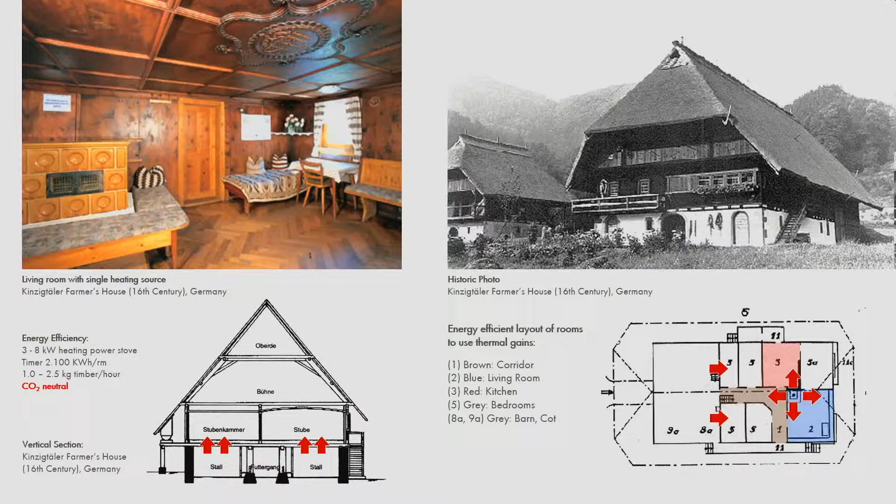So if you look over here, the barn was just over here. The warm air goes up, and I just had a kind of wooden floor, so the warm air was going from the barn into the living rooms. Then they had one central stove, one central fireplace over here, and they put all of the rooms around this one single place. So in the past, also the people have been smart. They've been working with whatever they had, both in the cold climates, but also in the hot climates.

Also look in the Middle East, this is like Dubai. People built wind towers. It was not about the cold, it was about the heat. How can we protect ourselves from the heat, or how can we create a more comfortable thermal environment? It's about human thermal comfort. So these people in the past, they didn't have air conditioning, so they built these wind towers. And later I'm going to show you one of our projects where we more or less copied or used a similar thing of collecting wind and bringing it down for higher thermal comfort of the people.

Now, also these were built hundreds and hundreds of years ago. Also, these kind of buildings were CO2 neutral. Of course, they didn't have AC and they didn't need a fireplace. They had so-called mashrabiyah windows in the hot climates. So they actually provided shading, they provided privacy, but they let the air passing through. And you know, I've been presenting this at a conference in Saudi Arabia, and people stood up, oh gentlemen, yeah, in the past everything was better, we were living without air conditioning, people were less sick, having no colds.

But actually, how does it work? I think we need to understand why we're doing these things. It's about our human being thermal comfort, how we feel comfortable. And the United States, or the Army of the United States, in 1943, did a kind of experiment, they put human beings in a climate chamber, in a climate box, and locked them in.

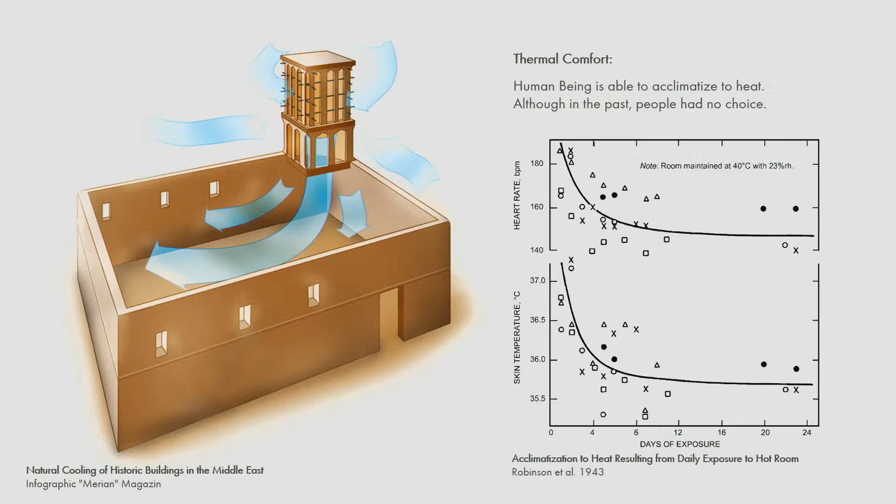And they started, you can see this is a kind of temperature over here, and the days of exposure. The top is the heart rate, the bottom is the skin temperature. And you know, when people are put into an unpleasant environment in terms of temperature or humidity or a combination of both, your heart rate goes up and your skin temperature goes up, so you're feeling uncomfortable. But this curve is going down, so after about 6 to 8 days of exposure, you start feeling comfortable.

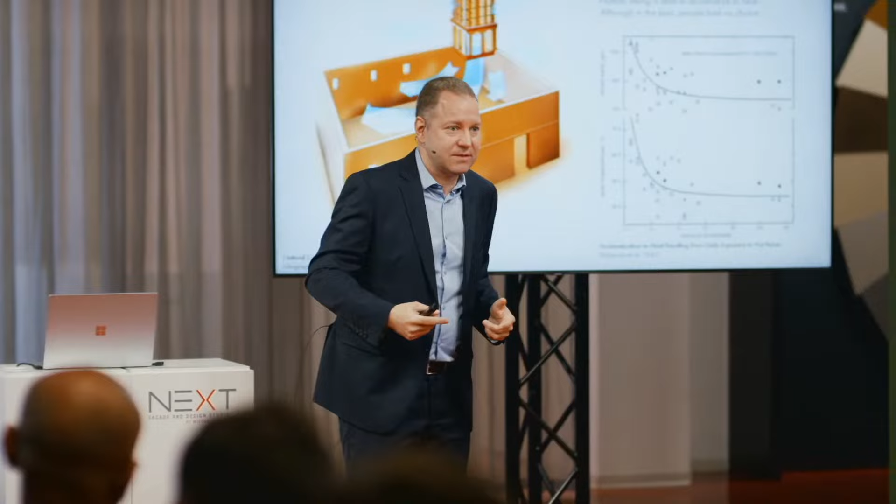It's the same when you fly to Spain for the holidays. At first, oh, it's so hot over here, and after a couple of days, you acclimatize. So we as a human being, we can acclimatize to different climates. But nowadays, we're no longer willing to do it. We want to put the AC up and down in our car and so on. So sustainability starts with the understanding of us as a human being, because in the end, we're building buildings for human beings.

And this is what the past is. So this is a kind of mashrabiyah to get some airflow getting in through there. So it's about the past, what people did in the past. Now, we're transforming some things from the past into the present, and maybe also into the future.

This is one of our current projects in KSA. Now, currently, Saudi Arabia is booming. There are a lot of developments over there, and we're getting questions, how can we create a more comfortable outdoor environment so that people can walk along and feel like in Italy, have a coffee, have a bit of gelato or ice cream, whatever. So it's about two things, about shading and also providing higher thermal comfort in terms of airflow. You know, when people stand, airflow is bringing your thermal comfort up in a hot climate.

So the whole idea, for example, with this project was to link the buildings. It's a kind of big development, and we're building a big central spine, we call it, and along this central spine, people can then walk along and get shading. And we also put in these so-called wind towers. You can see these kind of things that actually stick out.

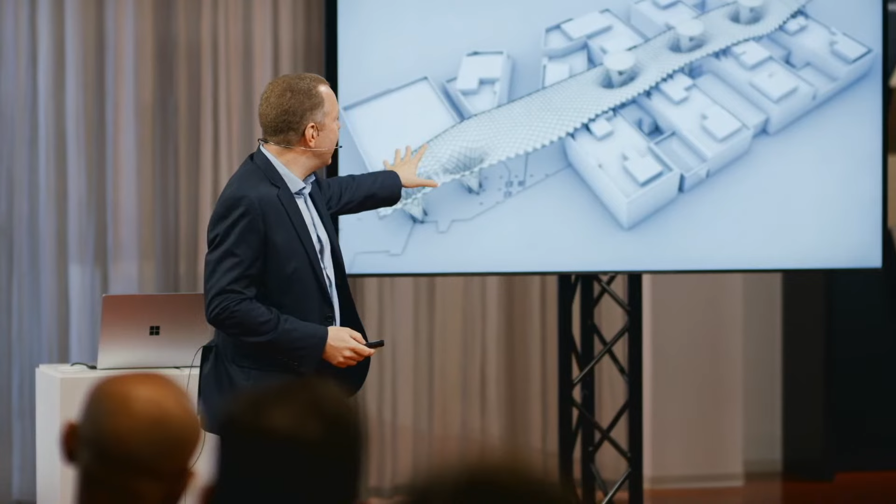Nowadays we know the main wind direction, so we know where the wind is coming from. We start collecting this wind and driving it down through the wind towers to street level, trying to achieve high thermal comfort for the people around there. This canopy has up to a 60-meter clear structural span, a kind of grid shell structure.

We put the wind towers in place. The wind towers have certain flaps inside - I'll show you later how the design works. But it's about thinking how can we get this designed, doing CFD analysis and all these studies, and then getting it built, meaning doing structural calculations and optimizing the geometry.

This is also something I try to explain to young structural engineers: the starting point is our brain. All these tools we have in terms of structural engineering or parametric modeling, Rhino, Grasshopper, and so on - it starts with the question, what do you want to achieve? The software only gives you an answer, but you need to know the question. Don't expect the software to give you both the question and the answer. It doesn't work. So we start with relatively simple geometry optimization.

In the end, structural efficiency is about arches. We're building arches like the Romans did, like the Pantheon in Rome, built 2,000 years ago - a big arch, the ideal shape. We do similar things nowadays, and this is not what the software will tell you. The software can optimize things later on.

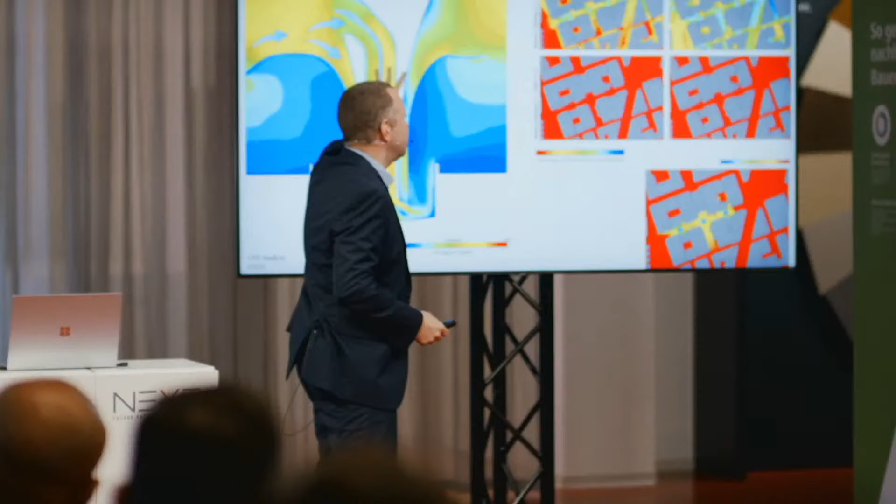This shows a couple of slides on the geometry optimization, getting the grid shell. There was another consultancy called RWDI doing CFD analysis, and this shows how we pick up the wind at the top. Our wind tower at the top has a rotating drum, so based on the two main wind directions, we can rotate the drum and collect more wind.

You can see here how the airflow goes at the bottom and then into the central spine. The blue areas here show zones where the thermal comfort of people walking along is significantly increased, without any mechanical means of cooling down the air.

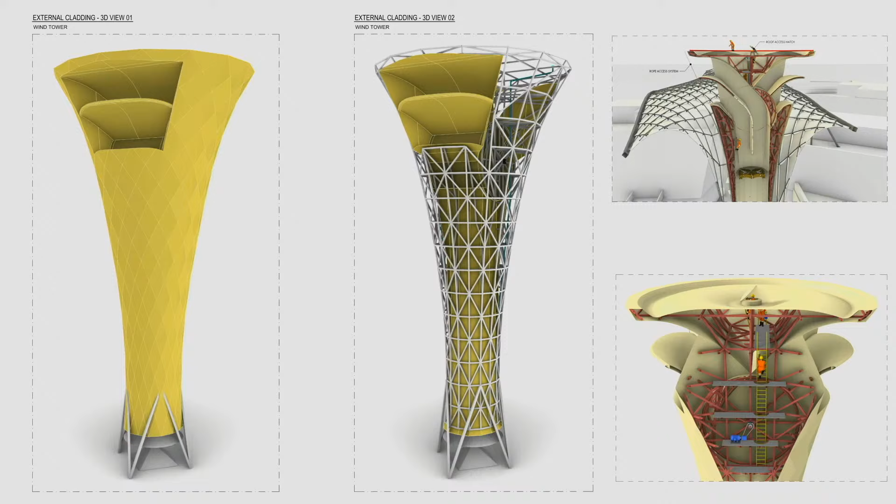So quite nice things, but the complexity starts with how can we realize it. You see here it's a complex steel structure, complex cladding, and the maintenance need to get in there - there are mechanical parts, a lot of components. We're building mega scale elements to improve the microclimate in the city.

With these things, people did ask, what about times when there's no wind? And totally agree, there are times with no wind. So we integrated a fan system, having mechanically driven air with silencers to blow the air artificially down by mechanical means. Of course this takes energy, I totally agree, but this is how we actually did it.

We then have a so-called misting system. It sprays a kind of water dust into the air to cool it down - evaporative cooling - and this runs almost 24/7. It shows the kind of complexity of things.

All of the shading is realized by kind of sails, fabric sails at a larger scale, pre-stressed, with a couple of nodal points. It's a relatively traditional steel grid shell with box sections and CNC machined nodal points - relatively standard, but at a big scale, let's put it this way.

Some more images showing the kind of system, and you see the complexity. This is a kind of custom design, this is what nobody did before. We take the requirements from the client - okay, this is the thermal comfort we want to achieve - and then we provide the technical solution for this. It's similar for outdoor thermal climate and outdoor thermal comfort.

This is one of our built projects, the Expo 2020 in Dubai. Werner Sobek was the lead consultant, the architect, the structural engineer, the facade engineer, and also the site engineer for all of these shades and sunshades.

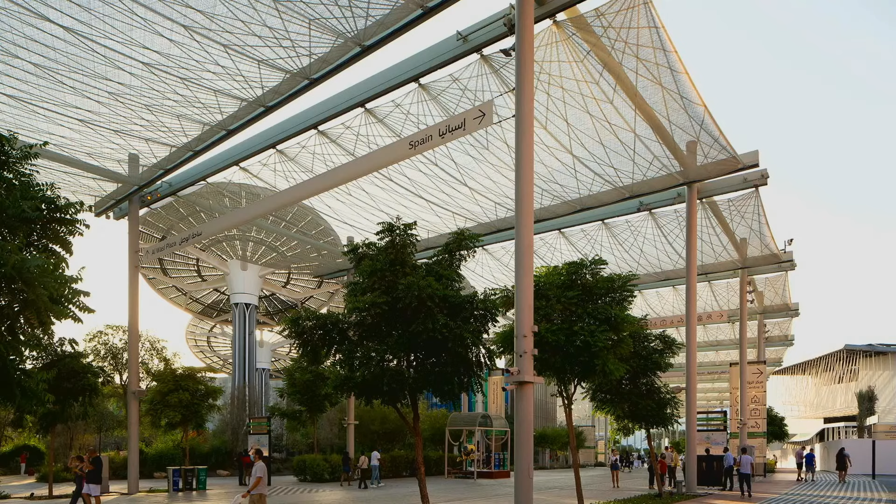This is a so-called active system, so it can be open and closed, this kind of operable shading system. This system itself, you can see here in a couple of nice photos, realized with an Italian fabric product.

There are three different types of shades, and there's going to be a video a bit later explaining what the background was. And I hope that this is going to work now.

We have to reduce dramatically the emissions. The announcement is to reduce CO2, greenhouse gas emissions, within 10 years by 55%, which is something different than saving 55% of energy consumption. This is even more difficult to achieve.

Everyone underwrites that, but nobody really makes clear to himself what that means, because if we are not capable of changing the technologies we use to produce the materials, to build the buildings, to run the buildings and to demolish them, then in 10 years we are allowed to build only 45% of the amount we are actually building now. That means half of us becoming unemployed.

Standing in front of a problem which says either you change everything or you cannot build in the way you build nowadays will urge this interdisciplinary process, that people start talking to each other and say either we invent something or we are lost.

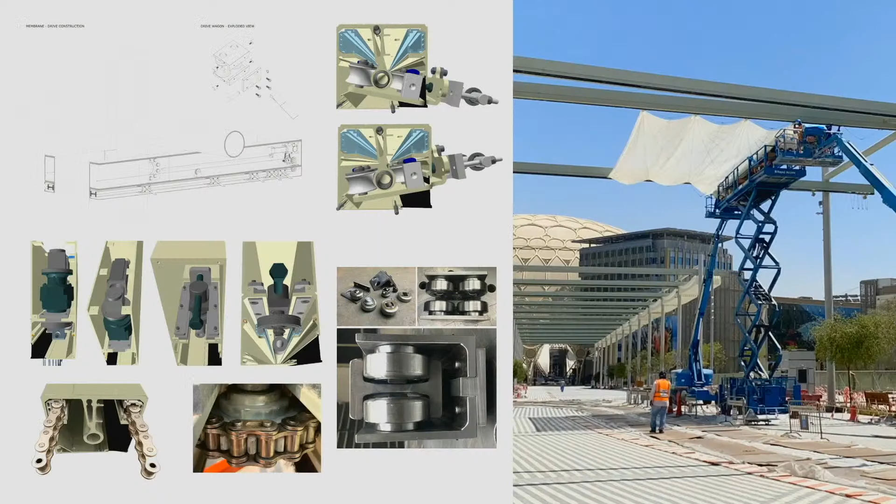There's a lot of mechanical parts also. This is what we take on as a consultant, as a complete challenge. We say we do the design for the membranes, but also for all of these mechanical parts, which need to be tested and proven, with the chain-driven motors and so on. This is the final system, how it opens and closes.

Now this project itself got a lot of awards for improving the exterior thermal comfort of the people there. It's really a nice example.

But moving on, using membranes, I mentioned before that we want to use membranes, and this is the kind of thing, you know, we have either opaque, transparent, or translucent materials. Now our facades always have to have a certain light transmittance, because the people in the building want to have light. This can be achieved either by glass, by transparent elements, or by translucent elements.

So this is the ThyssenKrupp Test Tower in Rottweil, one of the biggest membrane projects done in a vertical orientation so far. It's a kind of cladding of an elevated test tower. There are no human beings really inside, but it shows a kind of large-scale application. And you know, this is a kind of thing, so we started thinking about mono cladding, providing a rain shelter as a secondary skin.

So the outer skin of the facade doesn't have to be a piece of glass. It could be something more lightweight, translucent, letting air through, letting light through. There's currently a research project at the ILEK, at the University of Stuttgart that we collaborate with, using a kind of fabric, a fiber facade, using fibers to collect rainwater and also to get evaporative cooling.

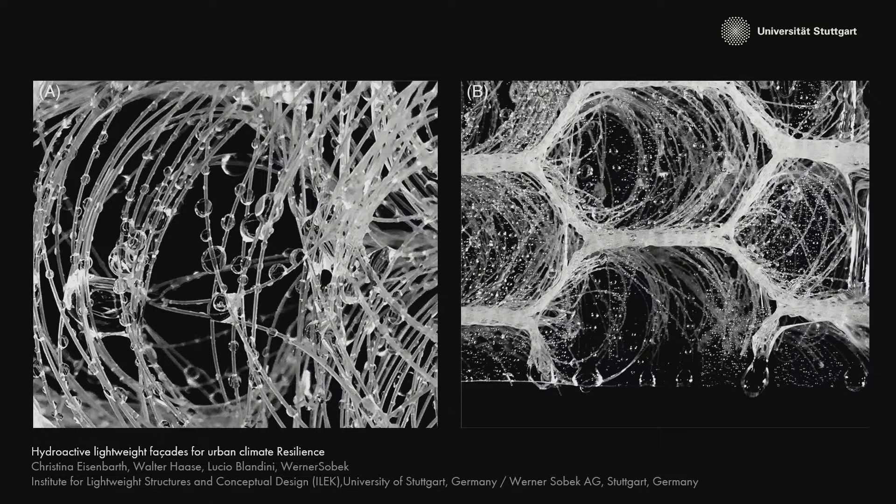Now these kind of things give the idea. We're using a micro mesh, very small fibers. These very small fibers are either able to collect rainwater, which we collect in certain drain channels, but at the same time we're trying to enhance the microclimate in cities.

Due to global warming, our cities are getting warmer and warmer. How can we cool our cities down? One thing is, of course, to plant trees, greenery, but often we don't have the space. I'll show you some project later on where we do this.

But the idea is that we collect the rainwater during the cold, rainy times. And then during the hot days of summer, we spray this rainwater on top of these microfiber meshes, and it evaporates with the natural airflow through this mesh to the interior.

This is a test tower by the ILEK in Stuttgart. You can see this is the kind of setup over here. It's called a hydroactive lightweight facade system for urban climate. The idea is that we are cooling a microclimate down in the city. So this is currently getting tested, and here are some results.

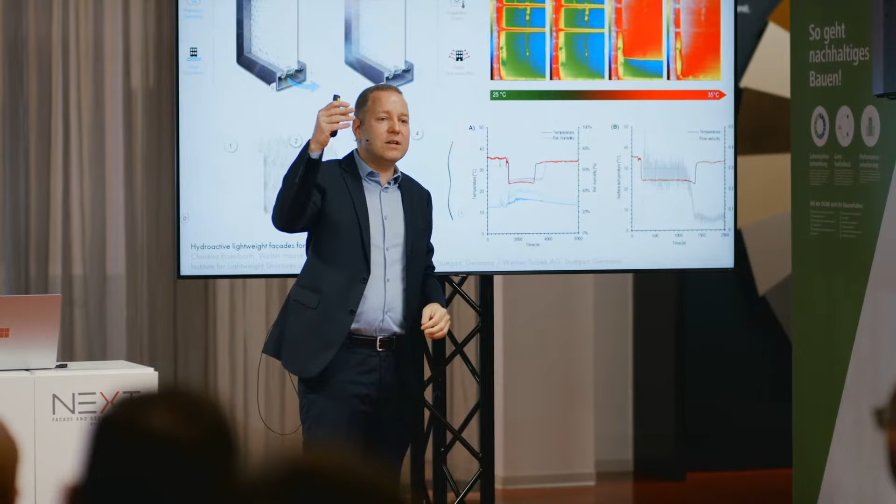You can see here, this is a kind of elevation of the wet state and the dry state. The wet state means we're spraying water into this microfiber mesh from the top, then we have natural airflow through this mesh. You can see here by the colors, we get a temperature drop of 10 degrees Celsius. The air is getting cooled down by 10 degrees just by means of water and natural airflow. No air conditioning, no compressor, nothing at all.

You can see here, this is a kind of temperature reading. This is the system being switched off. Then we spray water, and it drops about 10 degrees Celsius down. Of course, the humidity level is slightly increased, but we see this as a big future.

Maybe in the future, we're not going to have such a strict separation between glass and aluminum panel. We do something more lightweight, translucent, open kind of meshes. It also comes to the understanding of the human being, and this is the thing I'm very keen that we look into.

I'm currently working together with one glass supplier on the transmittance through glass. Every piece of glass that we're using nowadays has a certain coating on it, so-called low-E coating. So the transmitted spectrum through the glass that comes from the sun is a certain filtered spectrum. And this is the kind of thing about human beings and light.

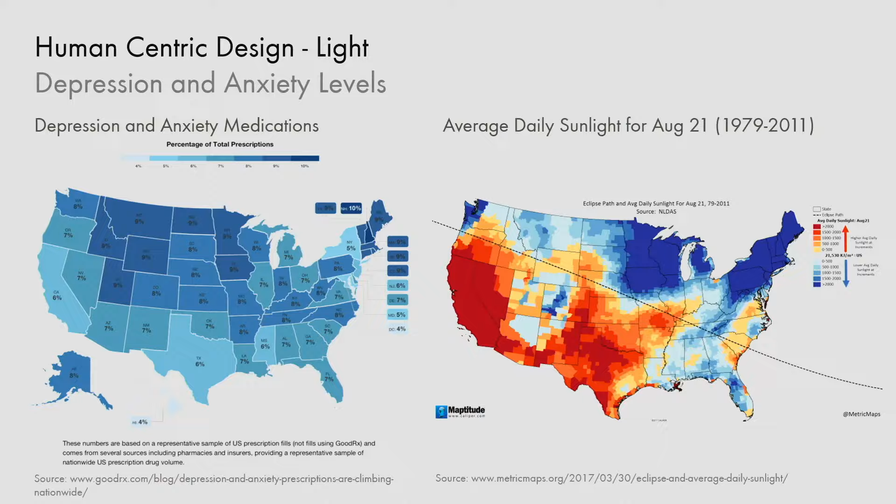At the same time, they have the highest amount of natural sunlight, so there's a clear correlation between sunlight and human well-being in terms of mental health. What does it bring us to? We as human beings became an indoor species. We spend most of our time indoors. This American study found about 87% of our time was spent indoors, inside rooms. We get our light from light bulbs and through glass. So we spend only 6% in vehicles and about 7% outdoor.

These are a couple of new things we're currently researching into: how the human being behaves under certain light conditions, and what kind of glazing we need for the future. What kind of glass selection, what kind of coating on the glass do we need as a balance between sustainable building design and human-centric design?

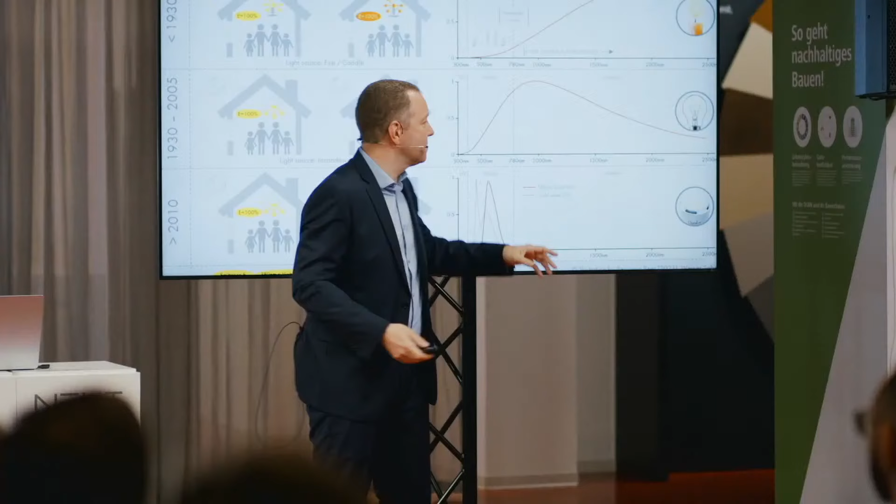For example, this is a traditional candle. This is the emittance, the spectrum a candle emits, and it's a lot of long-wave radiant heat, the long-wave red spectrum. Then we have the normal light bulb, which gives us a peak at about 1,000 nanometer wavelength.

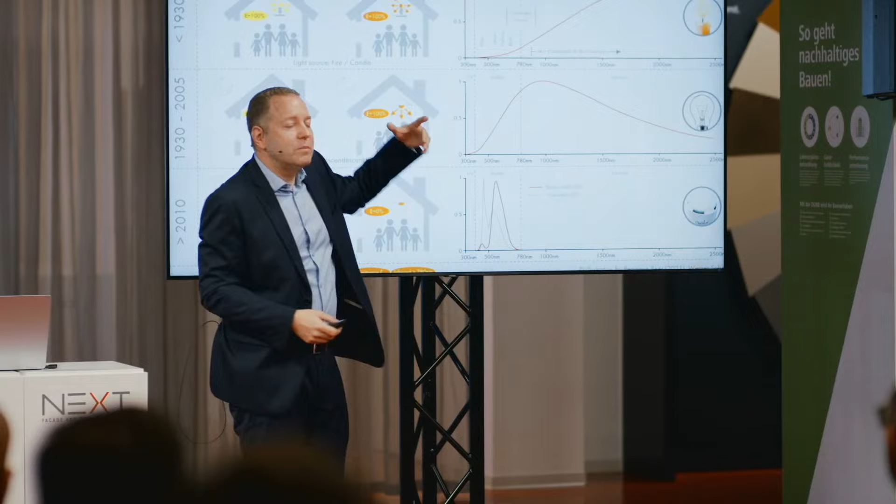What's important to know is that we as human beings can see the solar spectrum between 380 nanometer wavelength and about 780 nanometer. That's what we call the visible spectrum of light. Nowadays, for example, the LED light bulbs we have do not emit anything above 780 nanometer wavelength, and this is where the energy efficiency comes from. But this also means that in the past we as human beings were exposed to all of the spectrum, all of the wavelengths, whereas nowadays that's gone with LED lights.

If you now look into light and the human being - I'll go to the glass later - this is the penetration depth, how deep certain solar radiation, certain spectrum, goes into the human skin. You can see the penetration depth starts at about 800 nanometer wavelength. That's exactly the wavelength that LED lights no longer emit, and that most of our glass coatings no longer transmit.

Going through this to the glazing, to our glass, what we install: in the past we just had single glazing, or people were just outdoors. For outdoor people, you're exposed to the full spectrum of sunlight, the complete wavelength range, starting from the ultraviolet and blue to the visible spectrum and the infrared.

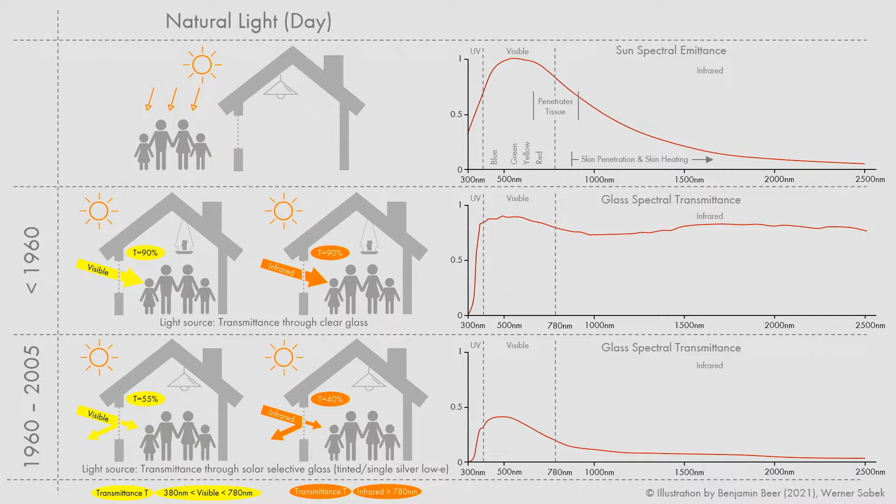Then came the so-called single silver and double silver solar control coatings, which went further, becoming more solar selective. What we have nowadays - this is the latest state of our low-E solar control coatings - they no longer transmit any spectrum above 780 nanometer wavelength. So the whole infrared spectrum is gone.

So we're doing certain things to ourselves as human beings. We humans have been on this planet for millions of years, and now, just over the last 10, 20, 30 years, we're starting to experiment with ourselves in terms of exposure to certain wavelengths which are no longer present because of energy saving. I'm not against energy saving, but...

I just want to show you, for example, all of your mobile phones - iPhones, Android, whatever you have, Samsung - they have this night mode. Your night mode takes away certain blue spectrum of the light, and this is important for the so-called circadian rhythm.

Talking about wavelength, this is a new medical approach against Parkinson's disease. This is the red light spectrum that our LED lights no longer emit, and our glass is no longer transmitting. I'll go through infrared relatively quickly - I'd like to focus on the blue spectrum. It looks a bit medical, what I'm talking about, but in the end it's all about our facade systems. We need to take the long way and close the circle, coming back to us as human beings and what we need to design.

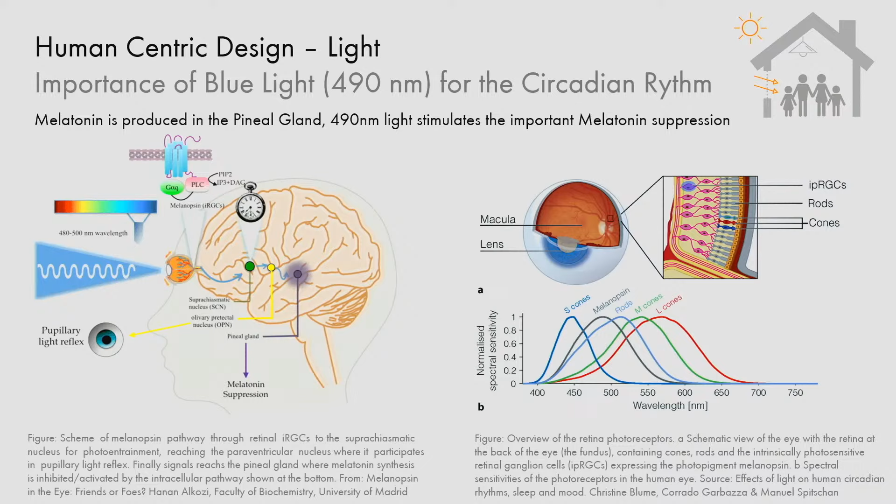Now, talking about your mobile phones and the night mode or comfort light you switch on - it usually takes out the blue light, typically in the afternoon when we're going to sleep. There's been medical research, even a Nobel Prize awarded for this - the circadian rhythm, which dictates your day and night rhythm. In the morning and at lunchtime you need blue light, but after lunchtime you should get less blue light exposure, otherwise you won't fall asleep. This is why mobile phones have this night mode - it filters out the blue light, making it more yellowish.

Why is this important? When we select glass, we have the so-called visible light transmittance of glass, which shows how much natural daylight in the visual spectrum the glass is transmitting. Now we have the so-called melanopic transmittance of glass - so we look at glass not only for visible light transmittance but also for melanopic transmittance in the blue light spectrum, which is important for us as human beings. We have to be smart and understand what the human being needs - it's not only about shading or G-value, it's about refocusing on us as human beings.

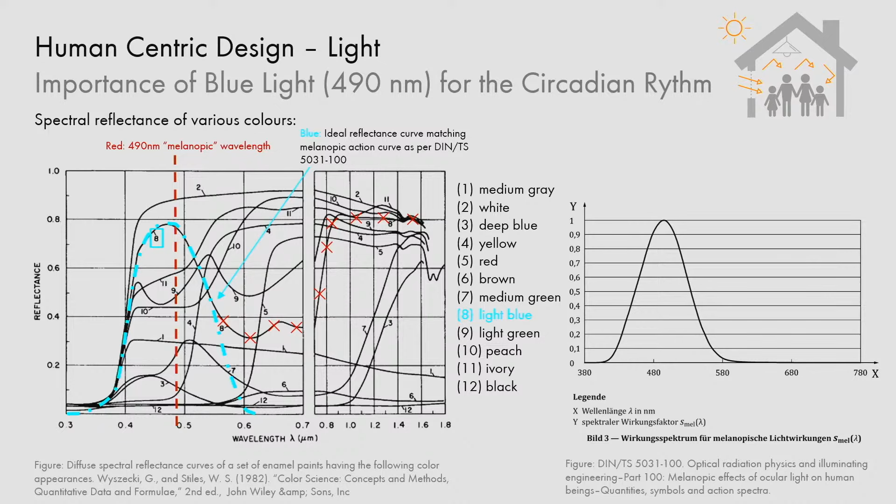Quite often it's not this complicated - let's put it this way. This comes into other things too, like what colors we use in our rooms. I think a lot of architects here know it's the so-called spectral reflectance of certain colors - is the blue light spectrum reflected by these interior colors? There's a lot of interesting research that, in the long run, will change how we design buildings and do interior design. It's all about refocusing on human beings.

Talking about 490 nanometer wavelength - what color is it? It's blue, roughly this bright blue, then going into dark blue and to green. This is the color we prefer as human beings, and it's exactly the colors we want when looking out windows - a bright blue sky, and some fresh green, not dark green.

Looking at the property market, how does this translate into real life? All the apartments around Central Park command a premium - park view is like double the price. So people want to see green, and people also want to see blue. This comes back to understanding what we need as human beings.

So what can we do? Talking about parks, for example, this is like Central Park - this is one of our recent projects, I think one of the largest true green, living green buildings. It's Kö-Bogen II here in Germany, Düsseldorf. In the end, the building became a park - we built a facade system that's completely green.

It's not only one thing - people ask why we do it. For example, adjacent buildings - people on the other side are no longer looking at the gray facade of a neighbor, they're looking into greenery. So the surrounding buildings' value goes up because people get a park view. So what's the future? Are all our buildings going to look like this? I don't think so, but we have certain issues we have to tackle.

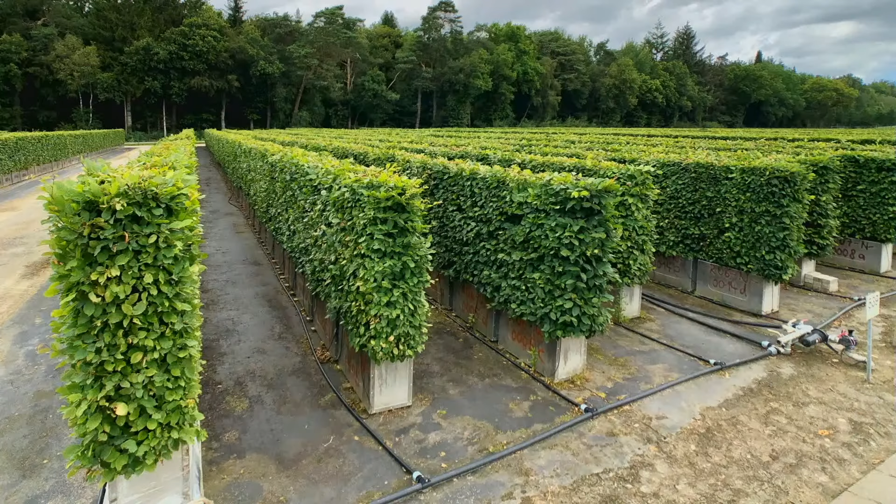We're talking about the living facade. It's a lot of collaboration between the designers, facade engineers, and also botanical people. So what kind of plants do you choose? You need to plant these plants, you need to do test mock-ups. And you can see on the left, the mock-up.

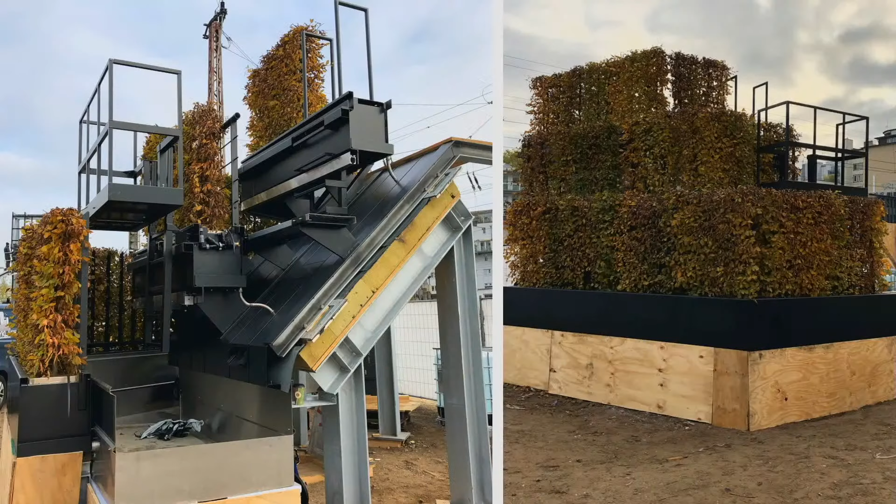You start designing certain planting pots. They need to be drained. If there's strong rain, there's too much water; there might be too little water. So you need to have a kind of system to get water over there. You need to ensure maintenance, so the gardeners need to walk along these kind of things. So it's a lot of things you have to consider.

It's in the end a completely different facade system compared to what we traditionally do. But if we say that we want to get our cities in a better environment, we want to do something about the micro-scale environments of the city.

This is a couple of photos from the construction. It's all prefabricated, the plants in the boxes. Now you can choose which kind of plants you're going to take.

These plants follow the rhythm of nature, so you have winter, you have autumn. There are some other plants that are always green, but in this case, the client wants to have something that shows also the winter. Of course, this is not the bright green that we want to see, it's more brownish. But this is what the client wanted.

Actually, the installation, a couple of slides. And this is how it is built. It's a really nice example. But I would say, can we also build such a thing in Dubai?

Put a question mark behind it. I mean, green is not always green. In the Middle East we have no natural water, so all of the water comes from desalination plants with a lot of CO2 carbon emission to get the water. So such a thing in Dubai, I would say, it's not really green. It looks green, but in reality it's not green. In a moderate climate like Germany or Europe, this makes sense because we have enough water.

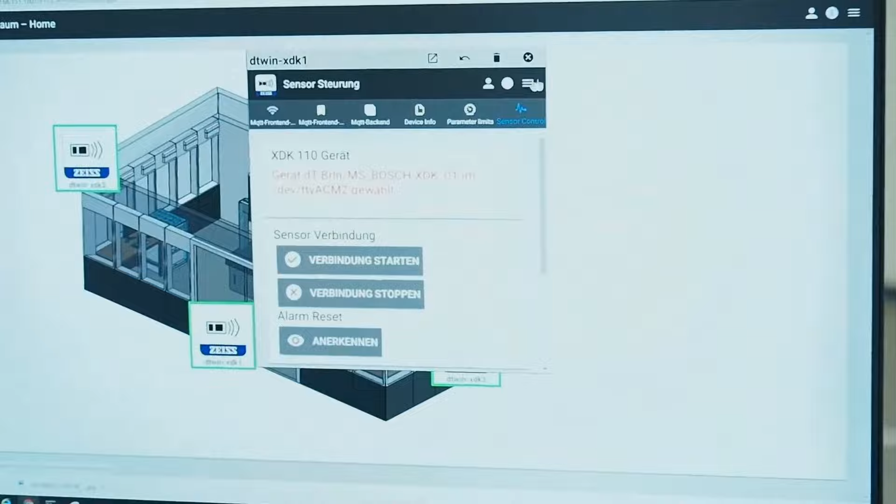Then when you start looking at your unitized facade system, there's a sensor at the top, and the system starts communicating with your VR glasses. Within the virtual environment, you look at the unitized panel and can see certain parameters, what this facade panel currently has in terms of wind speed, humidity level, and so on. So you walk along and grab certain conditions on the unitized facade panel, see all of the data, and then you can see if the facade has a malfunction, something isn't working, something's broken down.

You can log in as a certain service personnel, as the building owner, and put the shades up or down with just fingertips.

We see that previously some of these facade systems, these active facade systems, had the issue that the building owner has one computer and it's far away. So you walk through your buildings and every unit you can just touch it and see what's the current condition, how does it work, if there are some issues we need to fix, and so on.

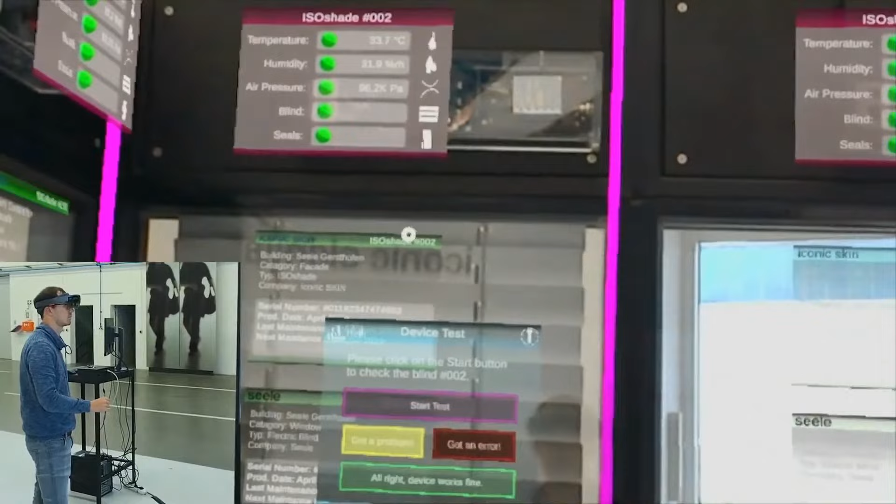Is it the future? Potentially. Is it kind of a technical gimmick? Maybe something in between, but we think it's a useful approach of doing new things, doing things a bit different, and being smarter, just using the technology that we currently have.

Just going to go to the next slide. Now these are the last couple of slides. I think the half an hour is almost gone, so I'm going to be quick now. So what's the future? At our office, at Sobek, we always want to think ahead.

What's the future? I'm a guy working a lot in glass, I'm a speaker at glass conferences. So we've got to think about this, because in the end, people like glass. And if you look at certain properties, people still like floor-to-ceiling glass, full-height glazing, compared to a punched window with small windows. People want to see, people want to have the light, people want to have the vision to the outside.

So why don't we build a kind of monospace? Just build a kind of glass box. Of course, people say it's completely crazy because glass is very weak in terms of solar shading, in terms of U value, and we all know glass is brittle, it's going to break structurally, it's weak, and so on. But why don't we give it a try? We need to see where we want to go.

Of course, a lot of technical challenges. So this is the kind of idea: to have a switchable glazing monospace, just completely glass, so you're almost like outside. This glass controls the transmittance, the solar radiation. We're also able to actively control which spectrum we're going to transmit from the light.

It's going to be without any aluminum. Sorry, Arvind, but it's currently designed as a kind of glass shell. Of course, currently we cannot do it, but we want to see where we want to be in like 20, 30, 40, 50 years. What's the goal? We need to see where we want to be.

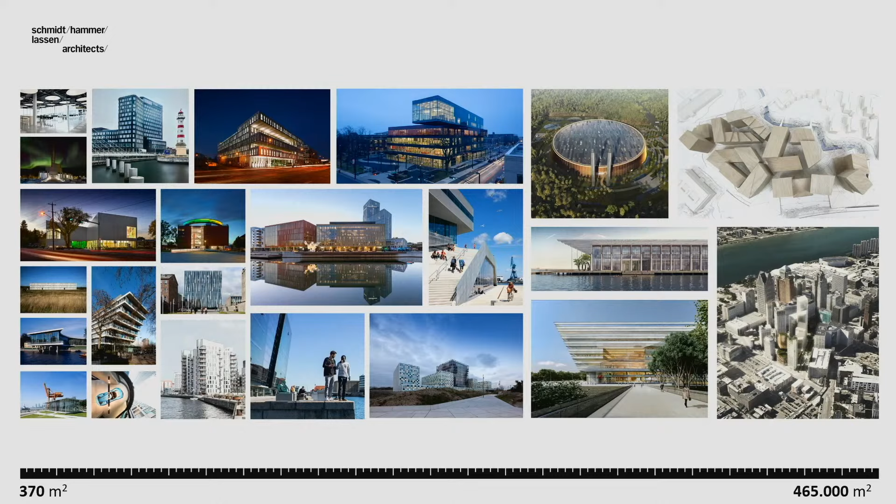I'm going to try to share a little bit about what we're doing in our design office and about a few of our projects. We are an international design studio called Schmidt Hammer Lassen, or SHL, and we do projects all over the world, specifically in Europe. Obviously that's where we're based, and we have projects in China and North America, but really all over the world. We range in different scales from the smallest pavilion to, as you can see in the top right corner, the world's largest energy plant in China. So we do all kinds of projects, but we have a design methodology that we believe is central to everything we do.

Even though the project is large or small, there's a common thread that creates a so-called DNA. And although we have the same methodology, we have various different outcomes and diversity in how it responds, because it's really about how we respond to the context of where we are. That's very important to us. We don't build the same or respond to the same environment or settings anywhere.

We need to be very focused on the location and the culture. So this underlying principle of contextuality is a building block that undergirds everything that we do, and our aim is to resonate with its environment, also in terms of materials, from the large urban scale seen from afar, but also as you move close and get to touch and feel and sense the tectonic and tactile qualities of the project. And of course, in the end, it's about creating great places for people to meet and to live and share ideas and basically create a community.

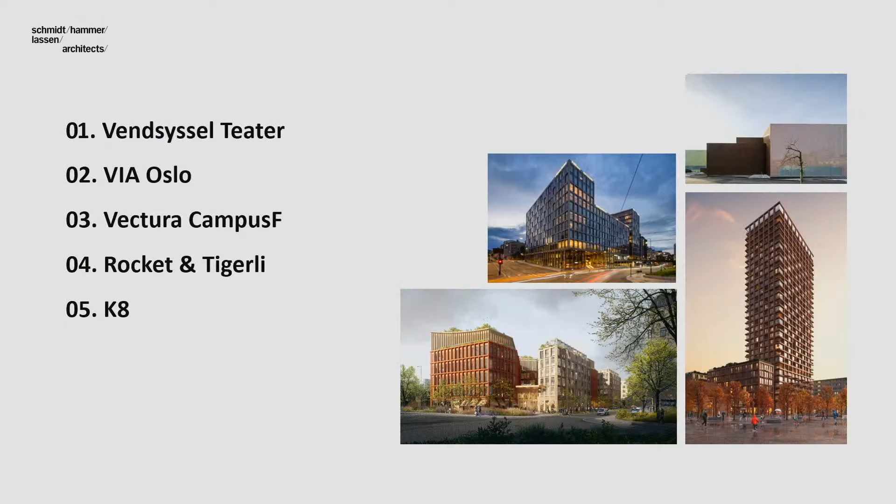So with that in mind, I'm going to try to go through 5 different projects that we did over the last years, and we'll start off with projects placed in a mid-sized Danish town of Hjørring in Denmark. It's one of the smaller projects, but not the least by any means.

Already in this image, you can get a sense of the duality in the project, in the facade treatment. The facade is closely linked to the concept of urban rooting, or a sense of belonging when you look at where we are placed in the world. It's a theater, and a theater is a sort of catalyst for cultural activities, and really an urban power center. This is Danish — it reads basically as the living room of the city, which I think is a good way to put it. It's a place that brings people together, and it shows that the building really works as intended, and also in a way fills a gap of something that was needed.

The spaces inside the building are organized to create a feeling of flow and openness, both visually and physically. It's kind of like a city within a city, in scale that corresponds with the urban fabric that we see in this town of Hjørring. So it, in a way, becomes an extension of that city.

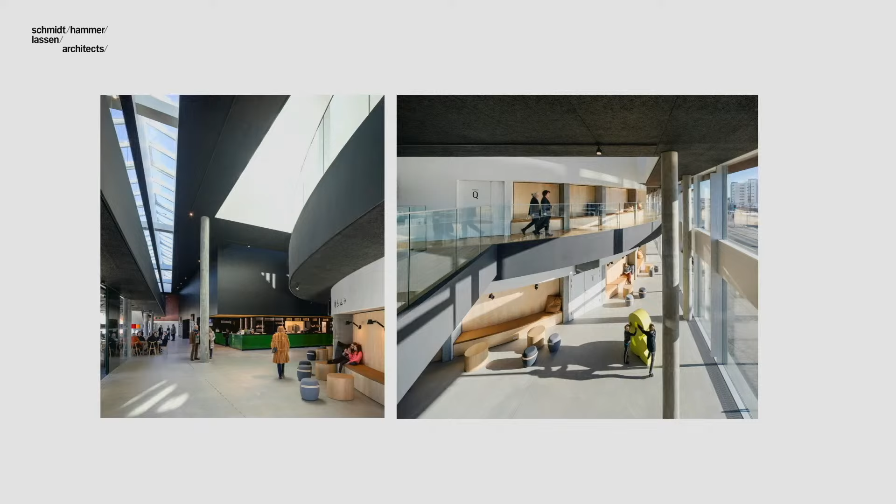Of course, in between this you have this space of plazas and streets where you can walk freely. The ground floor becomes this public space for people to visit, even though you're not there to see a theater play, but you're there to basically be part of a city and meet people and maybe drink some coffee or whatever you want to do. It's totally open to the public, and this attracts a wide range of users—it's there to basically support the life of Hjørring, this city.

Also, you can see that there's a lot of daylight coming in. That's also a very important factor in our projects—not so much when you're on stage, then no daylight. This is the main stage, which is basically arranged like a circus, to get this more intimate relation between the people and the actors.

So the appearance and materiality is what we think of as a modern interpretation of the classical theater. And what does that mean? We believe that a theater has a distinctive appearance in any city, in any cityscape, first of all, and often with the use of sophisticated materials, which makes it unique and something special, something more elevated in a way.

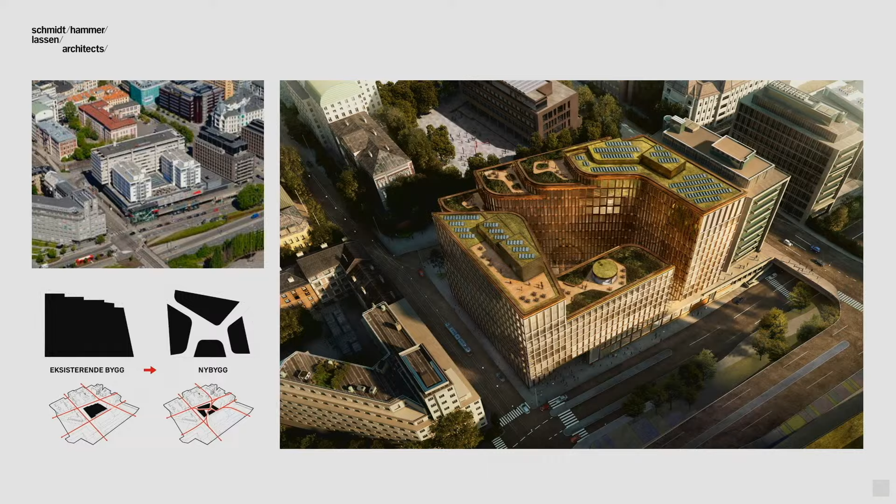I think we started more than close to 10 years ago with this competition in Oslo, an international competition that we won. It's basically the story of creating a new open block in what was previously a very closed block, as you can see here in the top left. It was an existing building, and we wanted to create a new place with the ability to crisscross and also invite people into the center of the block. Previously, it was closed and more like open during office hours, let's say.

The project that we have today is more or less a public open plaza. Then, of course, we always consider very carefully the volume when we are building in our cities. This is a very large building—I'm not sure if you can see it, but it's around 60, almost 70,000 square meters that we had to somehow try to fit in central Oslo. And I think it worked in the end.

So we're working a lot with variations in heights to try to massage the building into place. The project is really quite close and true to the first sketches that you can see here.

It's a city block that defines the streets on all four sides, and at the same time it invites people from all four corners. So it's like an open city block with portals on every corner.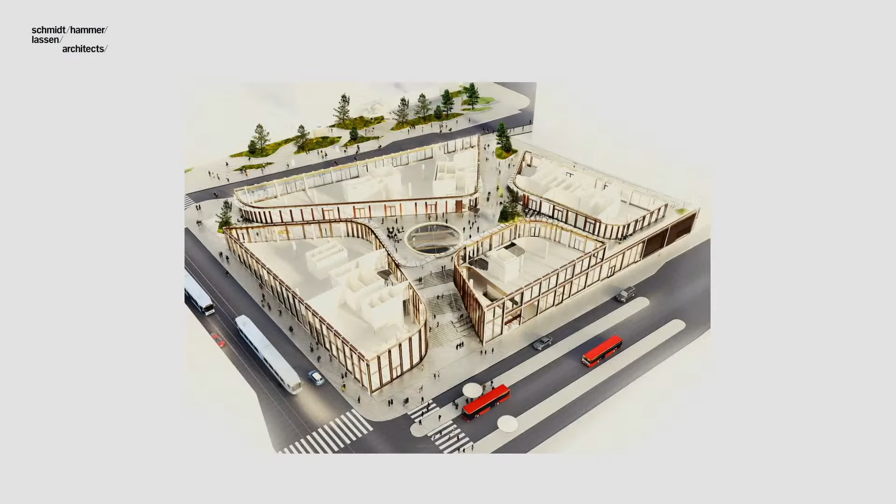So when you enter the courtyard, you get the sensation of a really unique and intimate space. It's not a huge courtyard, but it has this very nice human scale to it.

And like I mentioned, it's fully public. Anyone can go there any part of the day.

Since it's an office building, we decided to put all the office entrances facing the courtyard instead of the streets, in order to attract life into the center of the building and generate activity on this public square, which also has a fairly big skylight that brings lots of daylight down into the plinth of the building.

Now the terrain has a level difference of more than 10 meters. So basically you lift the terrain up to a certain level and put a lot of program, mostly retail, in the plinth. But this skylight was an important feature to bring daylight into the space below.

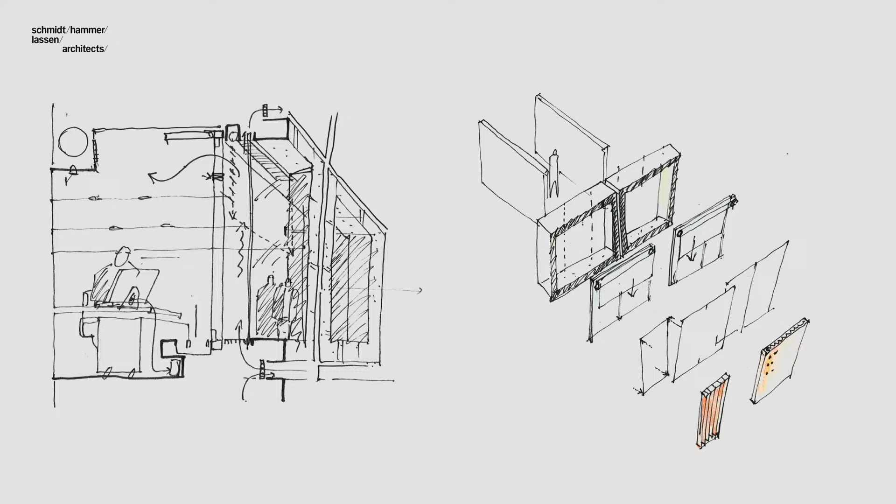And these are some of the sketches from early on, showing what our intentions were with the facade. This is the street facade, not the one I just showed, but the facade facing the streets.

A classic design, I would say, that works well with a unitized system, double skin, naturally ventilated. That was the starting point for us.

And of course, protecting the solar shading that is needed behind the outer layer of glass, because you tend to have issues with exterior unprotected solar shading, and we just didn't want that for this building.

And the street facade is a very classical structure. It's a grid of limestone, and it's kind of an interpretation of the modernist buildings that you see in the neighborhood, a lot of modernist buildings from the 50s and 60s with a high level of detailing, and we couldn't do any worse. Anyway, it was trying to respond to the qualities that we have in this area.

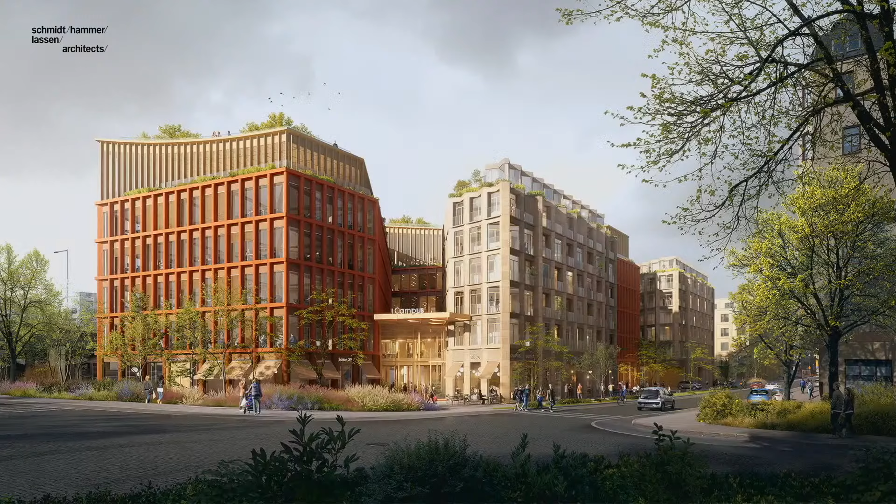This is a project in Stockholm that we won just recently, and I'm going to be a bit quicker. It's called Victoria Campus, and we are in a place that is very busy, where a lot of different neighborhoods meet together, so it's quite a complex space to design anything.

We're trying to respond to all these different factors going on. We have the park on one hand, and then the old Stenstaden, the 19th century neighborhood, and some new developments as well. We're trying to engage in this dialogue with the city, so this project will be the last piece of the puzzle, I would say. And you have lots of heavy traffic and trains nearby.

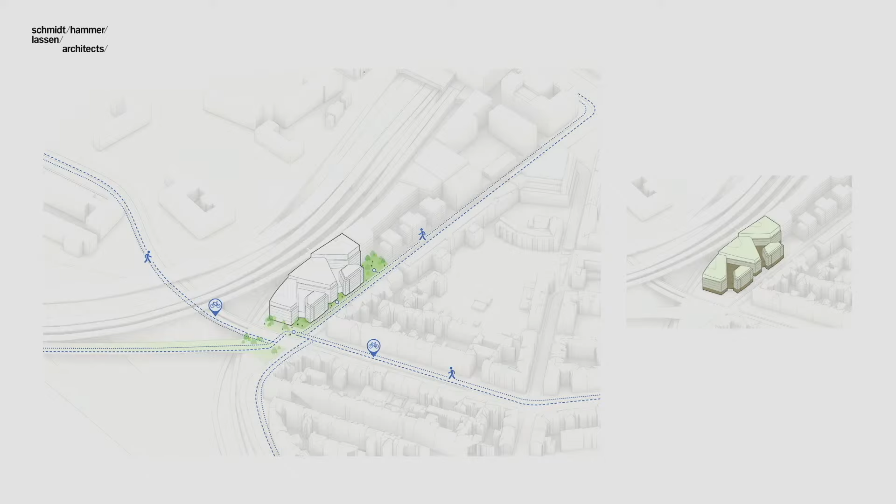Most people will arrive from the north, and here we are welcoming people with this green urban plaza that connects with publicly accessible interiors from the inside to the outside.

A few words about the facade. We're working with heavier materials and different types of stone, again because we're working close to the Stenstaden, which directly translates to stone city. The facades belong to the same building, but we are trying to work with variances while staying within the same design language, because this project consists of several buildings with several different facade skins facing different directions, and thus they have a different materiality and a different design.

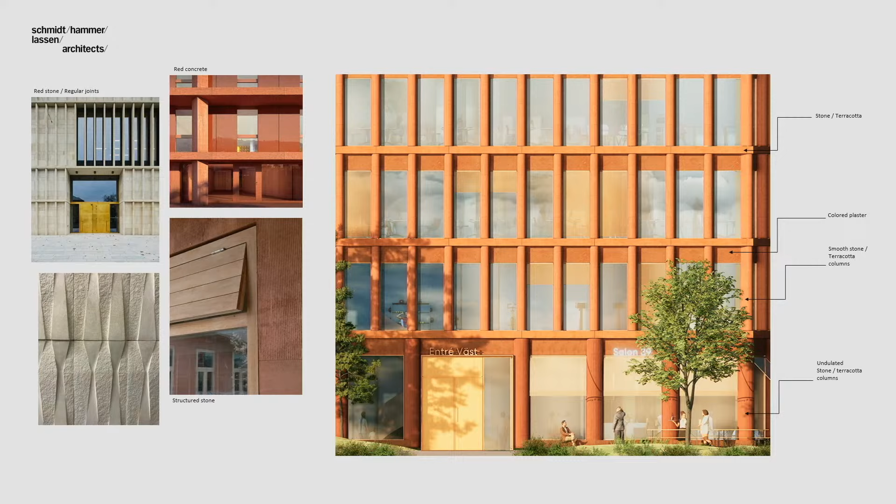Basically, we have two facades that each play a role, on the left and on the right, as you can see. The office building is this one, and it consists of red stone and terracotta, with details in light aluminum. It's also thought of as a unitized system that can easily be assembled in a factory and brought on site for easy installment.

It's a fairly new win for us, so it's going to be interesting to follow the project in the years to come. I'm going to talk a little bit about another win we did here just recently - I guess I'm going over time now, but it's what is going to be the tallest timber structure in the world, a 100-meter high timber structure in Switzerland.

Just to give you a little bit of the backstory, we are in a city called Winterthur. It's not too far from Zurich, and it's very much known for production industry of locomotives and trains. Today the city has become a progressive place of higher education and culture, so there's a lot of history that we, of course, would like to bring into our projects. They cherish their own 19th century industrial environments, and the architecture exhibits this high degree of detail that is very characteristic for Swiss architecture from this time.

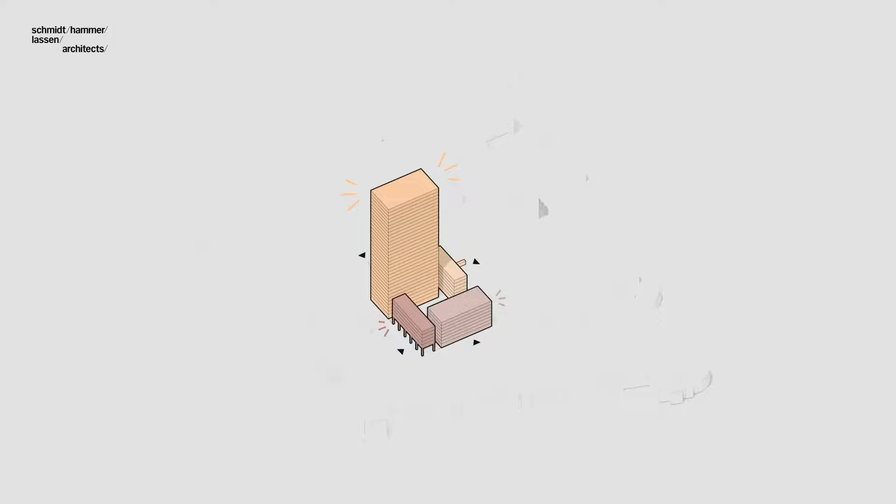So that's going to be a transformation hub for this area. Our design proposal is to open the area by creating attractive outdoor spaces that call people to interact, share, and create a culture and environment. We were inspired a bit by the spaces and breaks that naturally occur in the industrial architecture here, in these big factory halls and the little narrow streets between them. So we're using four buildings to frame the landscape, with retail and restaurants at street level, and this will become its own distinctive place with its own distinctive identity.

The building is residential, and we create a variance, an alternating pattern in the facade, by flipping the floor plan. Every second floor is basically flipped, and you get to break a little bit of the monotony in the facade by doing so.

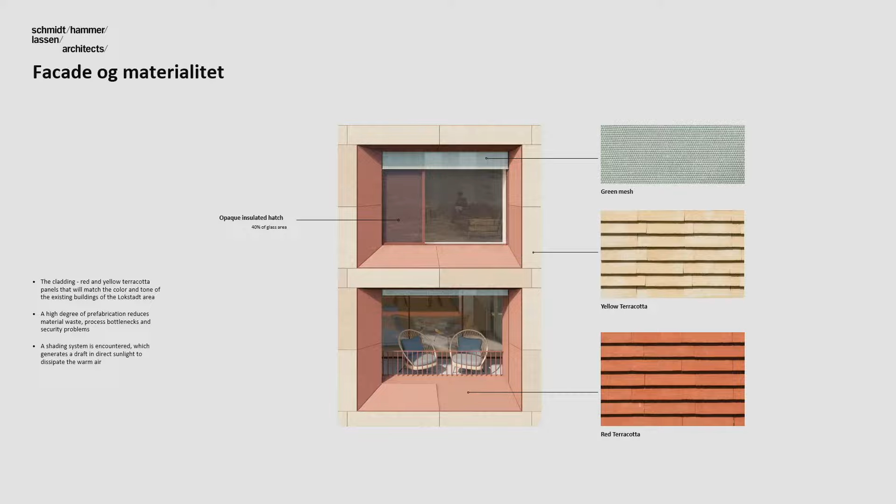The materials we are proposing for this project are also connected to the heritage you see in Winterthur with all these factory facilities. So we have dark red and yellow terracotta bricks combined with details in a dusty green color that we like, and this color palette reflects the historical buildings in this area. Otherwise, the buildup of this facade is prefabricated, and we're also trying to think of an easy way to dismantle the elements for this project.

The facade is not trying to hide the structural elements or the structural system, but rather emphasize it. So it's a very neat and clean strategy for the facade. It's a grid, but sometimes we have double height spaces just to not make it too repetitive.

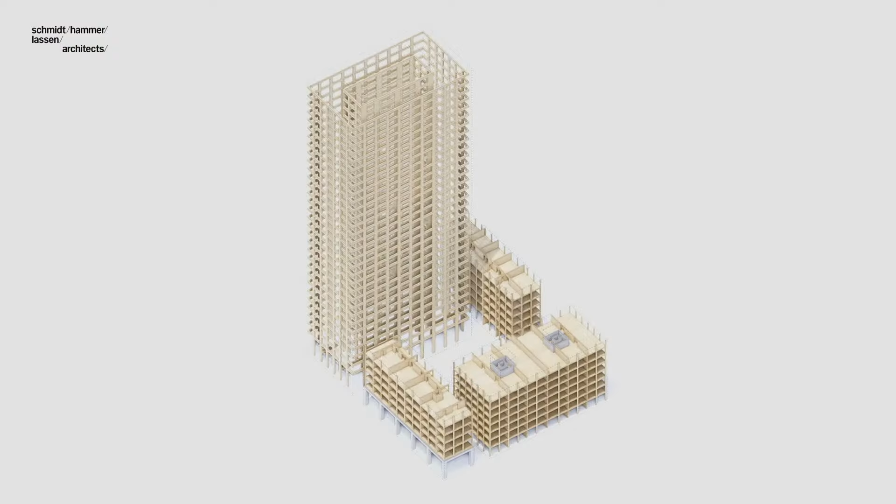The competition was really about using a newly developed structural system and seeing what you could get out of it. It's already a system developed by the client in collaboration with ETH, and that was the starting point.

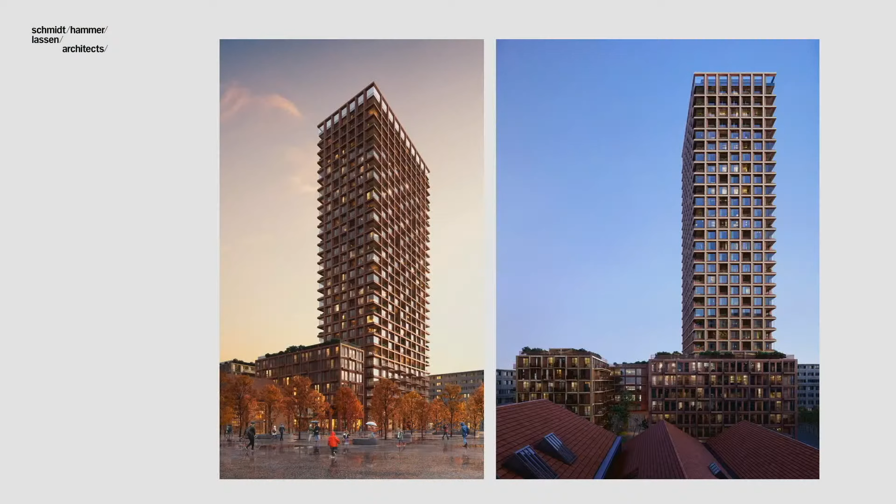So it's really a wood or timber building in every possible way, and this is what you could expect if you were to buy one of the apartments and have a really nice view. The project is hopefully due to finish in 2026, so there's a few years to go there.

I'm not sure, do I have time to take the last one? Yeah, okay. So I just want to bring in this last project, another Wicona collaboration, that we won in a competition a few years back. Now it's undergoing construction. We are in the oil capital of Norway, called Stavanger, which is also fairly small by German standards. On the west coast, the competition was about making a high-rise on a very narrow site.

It was very clear from the beginning that this was going to be a landmark, so it would have a huge impact on its surroundings, and also that we wanted to get use of this 360 view and design it from a 360 viewpoint.

It's mainly office in this building. We do have some common functionalities or program at the top floor, and there is even a church in the base of the building that was there already, so there's an interesting mix of programs here.

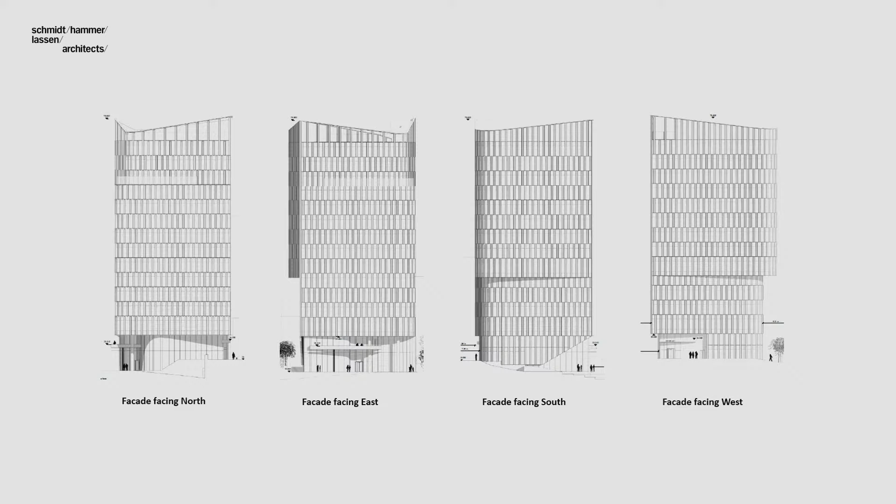So the tower has been adjusted since then—this is not a high-rise anymore by any means. We had to sculpt the volume as well to maintain a proper distance to the neighbors; that was a bit of an issue too. As you can see, the lower part of the building has been pushed in, and there's a little setback there.

But all in all, the facade is really wrapped around the building, 360 degrees, with corners that are curved. Towards south and west we have this closed cavity system, so again we're splitting the facade between a single skin and a closed cavity system. A lot of the work has gone into solving the detailing between these two systems, kind of like what we did for the VIA project in Oslo.

For this facade, it's clearly an aluminum facade. We tried to work with different variations of anodizing to create some kind of play in the facade and the way the sun reflects off it. But it's a very clean concept overall, aluminum and glass with spandrel panels.

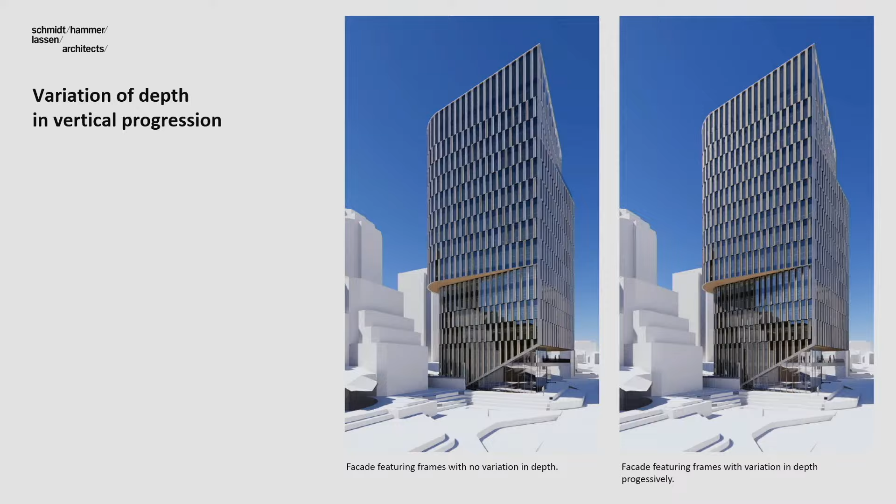Towards the top you also have roof terraces that are for common use, like I mentioned, having great views over the oil capital.

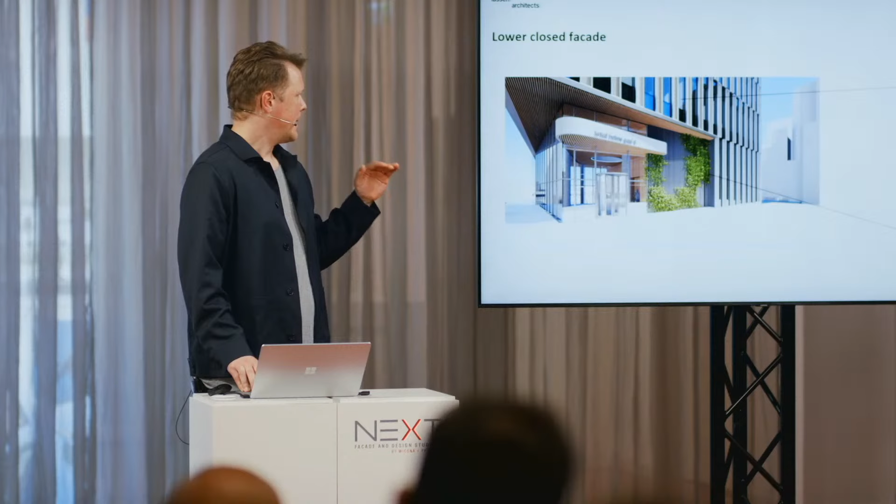Yeah, I think I do have a couple more images from the entrance, and I'm gonna quickly go through. We sometimes have these opaque panels, as you can see here, and we try to incorporate green in this image. It just shows that we are working with the green elements in a very simple way. And the previous image was showing the entrance.

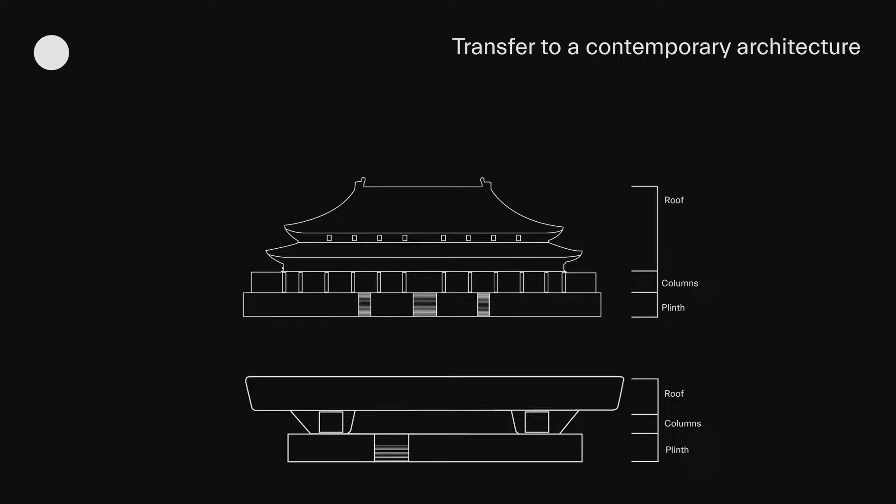The traditional Chinese building looks a little bit like this. This is obviously the Forbidden City, so we put the highest possible rank, but anyway. So you have a plinth, you have columns, and you have a roof.

This is basically also the idea we took for our library. It's kind of schematic, and maybe a little bit dumb, but it's very clear-cut and you can explain it well. We have a plinth, we have the columns, and we have the cube on top that symbolizes the roof. For us, these two elements, the plinth and the roof, stand for two worlds that come together.

The traditional, historic aspect of a library that is rooted in the city, that has a connection to it, and the roof that stands for a future, maybe, of a digital library and what to do with it. I think the other thing that is really important is how to bring the two things together, because in the end, you don't want to look at a library from the outside. The question is what happens on the inside and how can you generate something interesting.

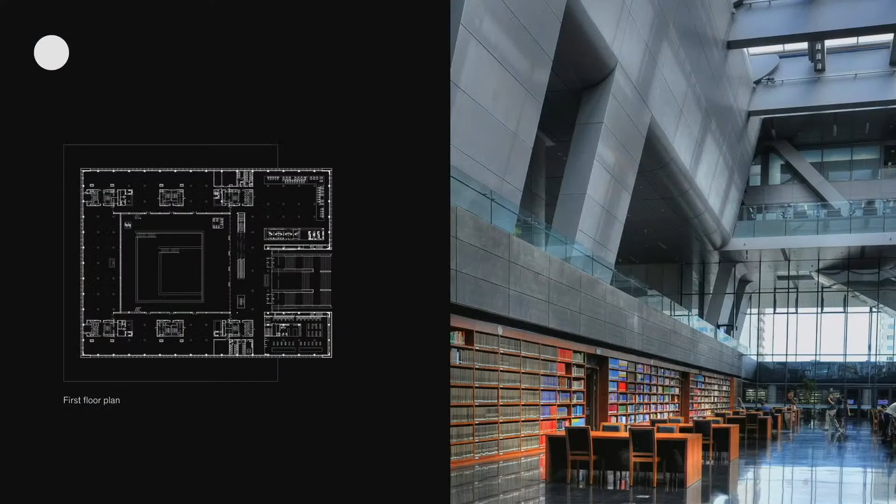For us, the most important space, you can see on the right-hand side, is that big atrium reading room that connects everything. Funnily enough, I still meet people who tell me, 'Oh yeah, I know that building because I studied there,' since they're quite close. The library is obviously very big, 12 million books, so there's also a lot underground, not everything is there to see, and 2,000 seats for reading.

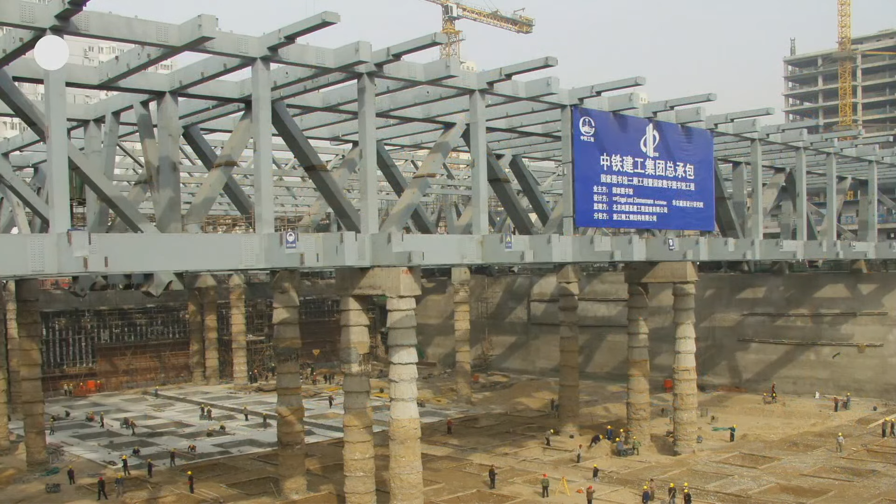One thing, because we're in a technical discussion here, which is interesting, is it's a very big steel structure that is floating, constructed in an unusual manner. The steel structure was built first, then the underground was dug out, and it was kept on little columns, then pushed upwards hydraulically, and later the plinth was built, which was quite challenging but worked out fine. So we're very happy. Here you can see, in the interim, the steel structure is built and the columns keep it there temporarily, and then it gets lifted up in a big ceremony where everybody looks on.

A second project I brought, basically because it has no facade, which I felt is also an interesting alternative, is the Meixi Urban Helix. This is also a competition win. Maybe for those who don't know, Changsha is a 7 million inhabitant city in southeast China, not at the sea, but slightly inside in Hunan. Mao Zedong is from close to there. So not a lot of people know the city, but that often happens in China, where you have very big cities we haven't heard so much about yet.

They are building a very big urban extension, 38 square kilometers. There's a big master plan by KPF that has this circular lake. You can see it here. That circular lake, and in that lake, because in the master plan there's a big axis that runs right through the middle and hits the lake, there's an island. Then they built all the infrastructure and started building the buildings around. At some point they realized, we have an island. We built that island, we don't really know what we're going to do with it, because we already have a museum. What can we do?

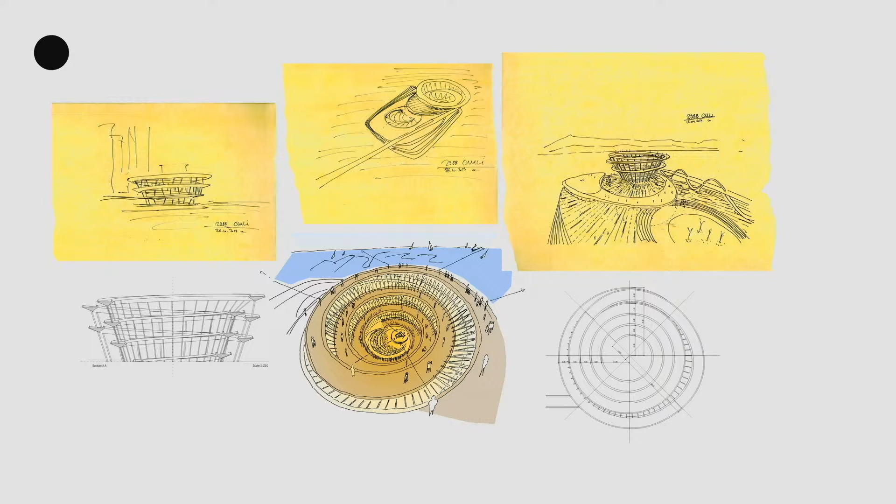They made a competition which we won. Basically we said, okay, you already said it, you don't need another building. You need something different. We decided to work with the public space, and because we anyway need a bridge to come to the island, we decided to work with that bridge and spin it up into this helix-shaped building. So there's a spiraling ramp going up and a spiraling ramp inside going down, leading to the island, making that process of arriving into something on its own.

We're not inside of a built environment, but inside of a new urban construction, so it's still changing all the time. We propose to make an exhibition for people to see, okay, this is what we're going to do. You walk around the ramp, you have different podiums with exhibitions, you can have the connection to the outside and the inside, and make people understand what is happening there.

This is the basic diagram. You have that big axis, you see the whole big city extension, you see the circular lake, and you have a question mark where the island is. What do you want to do?

This is a steel construction which we worked on with a lot of energy to get it done. It was not very easy to get it built because Chinese structural norms are motivated by concrete construction, not steel construction, and it works very differently. But by visiting the national expert commission twice, we convinced them it was doable, also with our partners, structural engineers, and our Chinese partners who helped us a lot.

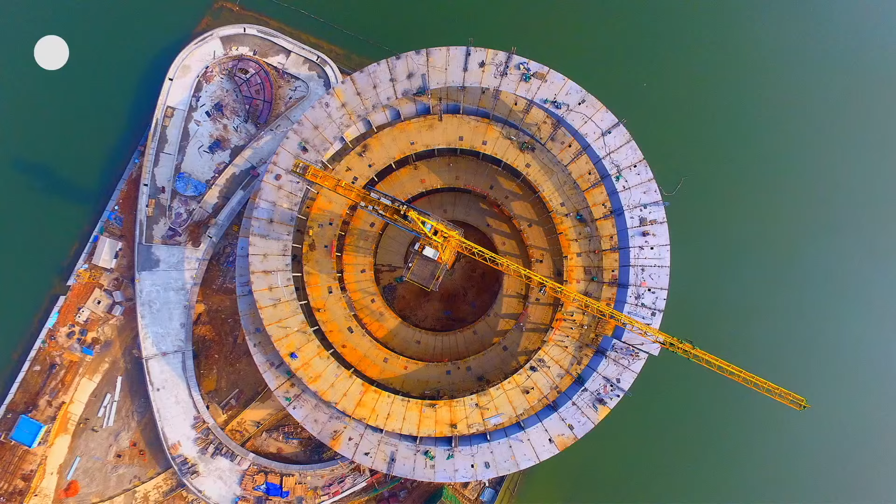We built this basically in prefabricated elements. You can see here the last element on the right-hand side being lifted in. It's a quite sizable structure. It's always hard to judge, I feel, even for me. I remember when we had it on the Rhino model, and you always thought, oh, okay, it's not so big. Then you arrive at the construction site, and they just dug the foundations, and you're like, oh, this is going to be sizable.

It's about 86 meters in diameter and 33 or so in height, so it's about 1.5 kilometers in length if you walk it the whole way. So it's a good stroll.

Here you can see a couple of images during construction. Basically you build the structural core somehow, which consists of 32 steel columns with 30 centimeter width that go over the whole height, and then you hang the ramp around it. And this is the finished result.

Here you see the section with the 2 ramps, and here you can maybe feel the scale of the whole endeavor. The ramps are about 6 meters wide, so it's a very big structure at the end of the day, but in the whole setting it still feels not enormous.

The good thing also is, obviously in the last 2 years you couldn't really travel to China so much, but before I have been there once or twice. Funnily enough, people do actually go there. It's one of those things where you always think to yourself, okay, are they going to actually do it? You build that thing and hope for the best that somebody's actually going to walk there.

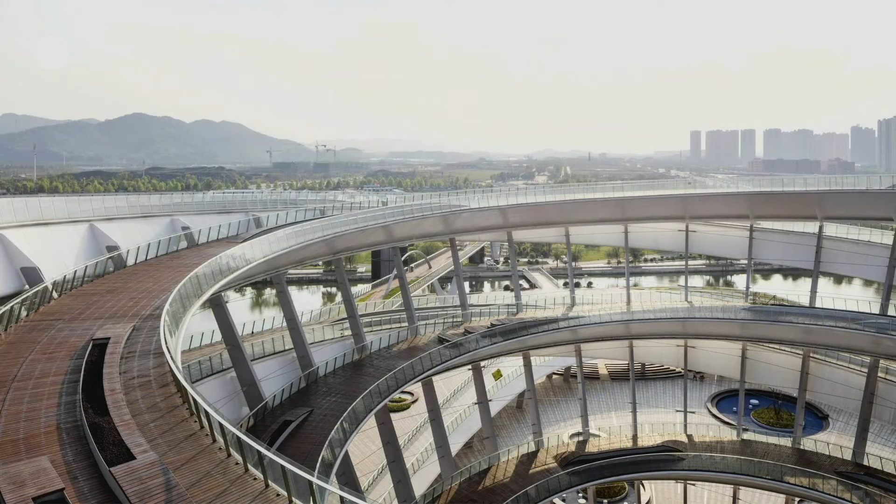But here you also get a bit of the feel of how it is going up and down, and how the different views inside and outside work together.

One project that has been ongoing for a while is a competition win from the end of 2015, in Shenzhen, the new art museum and library. Shenzhen is obviously one of the strongest developing cities in all of China over the last couple of years, right next to Hong Kong, with huge development especially in the tech sector. At some point they also have a very big city extension, which tends to happen when you grow so much, and they decided to develop a new art museum and a new library for the city.

And it's again a similar setting - you can see it in the back, there's a lot of high-rises already in place. You have an urban development in the south, which is very light, where there's a very big outdoor shopping mall in our back, kind of a commercial center, and we look towards this.

What we try to do, because there are 2 buildings and 2 competitions at the same time for those 2 buildings, we decided not to treat them as 2 separate endeavors, but as one thing together. What we also found very interesting, and I hope you see this in our design, is the question of what happens in between. You have 2 things to work with, and how can you activate the space in between?

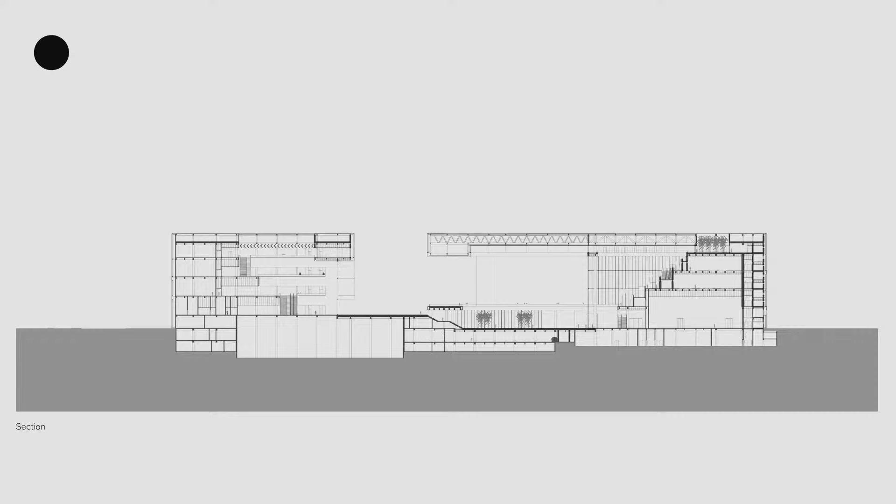As you can see here, it's obviously also a very big building, around 74,000 square meters above ground, about half and half for the 2 building blocks, library and art museum. The art museum and the library are about 80 by 80 meters as enclosed spaces.

Then we added this big roof, because as I said before, the subtropical climate means you have two topics - one is shading, but the other is also rain, there's a lot of humidity. To cope with this, we proposed this big roof, and also to give the gesture more strength.

This is the library building. I think in terms of facade, this is also an interesting topic. You are working with functions that don't necessarily need a lot of daylight, especially in a climate that has so much light - if you work, for example, with books that need protection, you can't put them next to a facade because it's going to destroy the historical substance.

If you have art, it's even more of a problem, because the current tradition of exhibition design for traditional Chinese artworks works a lot with dark spaces, not light spaces. Therefore, the implementation of uncontrolled daylight is always a big issue.

You can see this with our Chinese facade firm, which works with basically a parametric system. It's a 4.2 meter long element that comes in 8 different versions, opened and closed more or less depending on what's happening behind in the facade. If there's an opening behind that needs light, it opens. If what's behind doesn't need light, the element in the front facade is bigger and covers the facade behind.

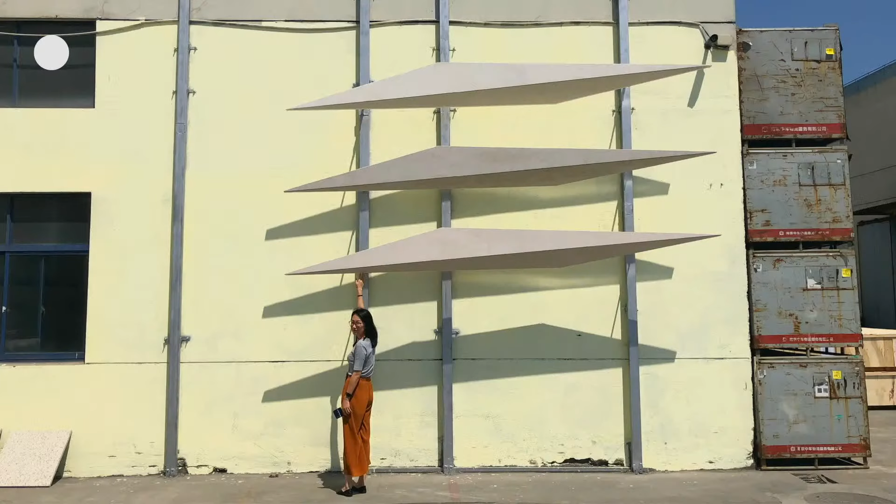This was a long struggle to get there, but I feel the outcome is quite convincing. You can see a little bit the scale with my colleague there. We decided on the lower element.

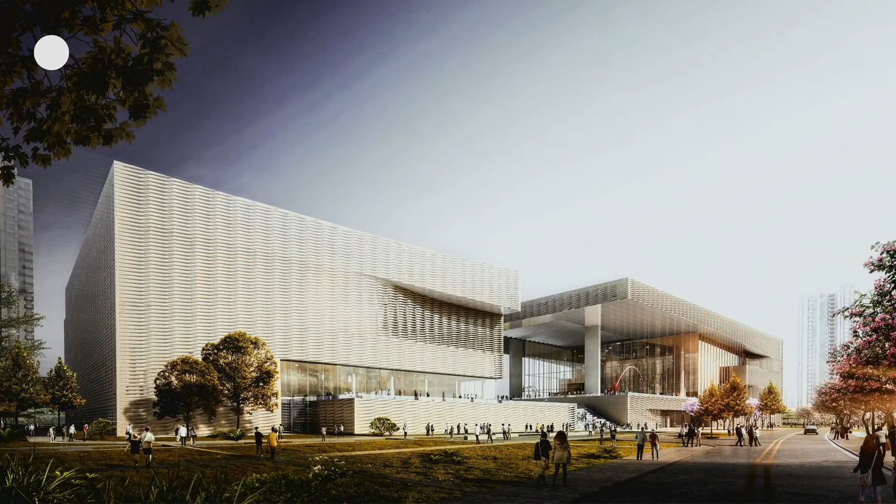This is a view under the roof, into this central space where public activity can happen, and you can see inside the museum space with its big staircases. This is again a view from street level, giving a bit of an impression.

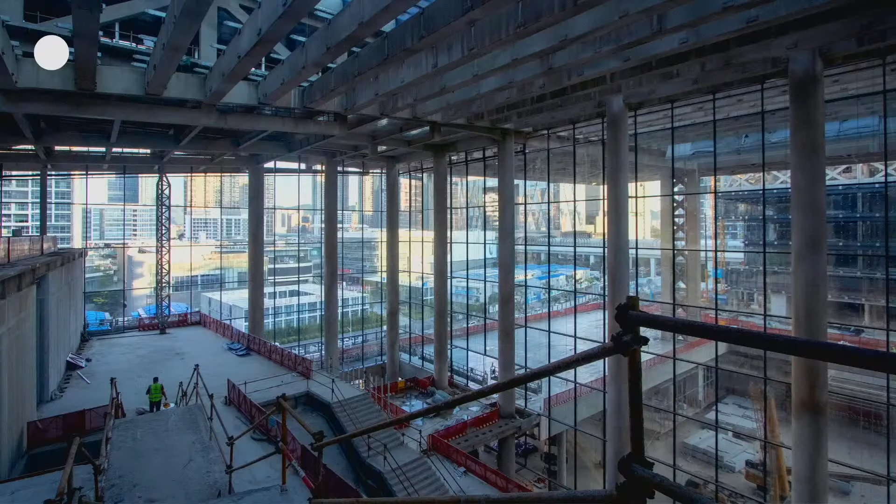Construction is on its way right now and actually quite far along. We believe the building should be finished sometime middle of next year, spring to summer. This is the library a couple weeks back, and this is the art museum a couple weeks back. The facade construction has been progressing quite quickly.

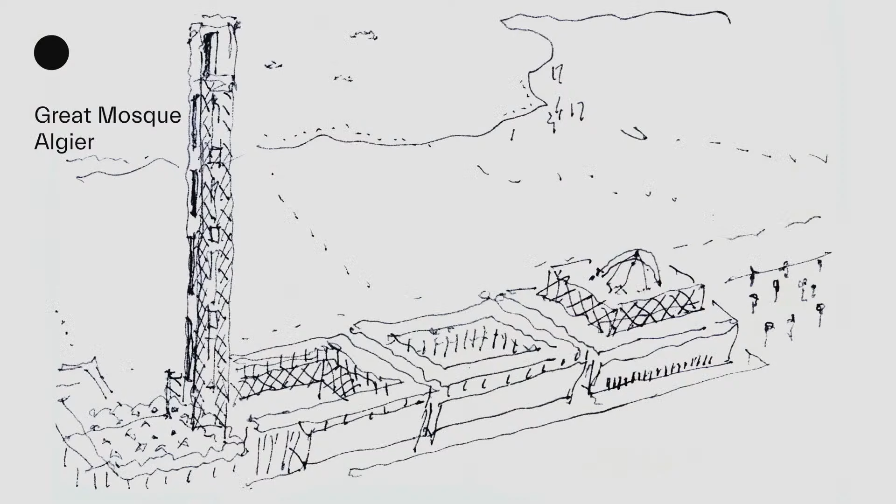Last but not least, I have one more project, since I know there are people who don't have a connection to the Chinese market. The Great Mosque in Algiers is a project we've been working on for a very long time.

It came from a competition in 2008-2009. I had just started working in the Frankfurt office, and it was a very big team effort. It's actually a funny story—2008 was obviously not a very good year for architects in Europe, and this was true for us too. In Frankfurt, there weren't as many competitions as usual, and everybody was sitting around a bit worried about what would happen.

At some point we saw this competition coming in and thought, why not try? I don't think anybody at that point would have thought we'd win the competition, or even that we'd get to build it. But here we are, and I feel this is actually the nice thing about being an architect—sometimes surprises do happen.

The competition in 2008 had a second phase. There were three first prizes in the first round, and then a second phase that took until the end of 2008. We started working on the planning already in 2009, 2010. Construction started around 2012, and we finished the building in 2020.

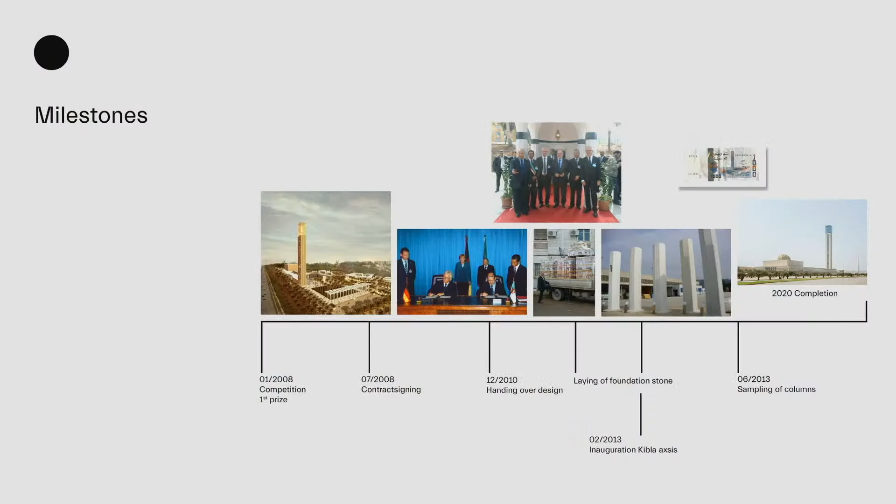As I said, it's a project that went over a long time. Interestingly, it also had big importance at some points—Angela Merkel was there when the contract was signed, and made sure that we would also sign.

The whole development is not only the mosque itself but also embedded in a cultural center consisting of a conference center, a big library, a Quran school, and 12 different functions added inside a park—from housing to a fire station to a power plant. Lots of different things needed for a development of this scale.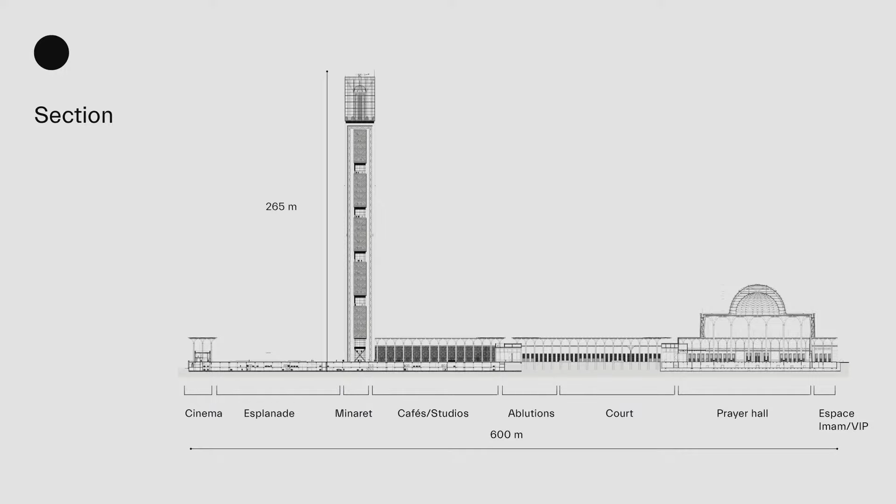Here you can see the central section through the mosque, and you can understand the process you go through—from a more public plaza when you enter, where the minaret sits, through the esplanade, and then step by step, from one square to the next, going from more public to more private functions, with the prayer hall at the end, and the space for the imam one step further. The whole mosque, as is usual, is oriented towards Mecca.

Yes, and there's also one height running through for all the outside functions, and then a second height that works up to about 40 meters for the prayer hall, with a cupola on top. A cupola, I will say, that we did not have in the competition, but the client was adamant we add it. So this is what happened.

On top of the minaret is not just a minaret, it's a kind of multifunctional tower. It houses a museum through stacks of five floors, as you can see here. They house different functions - one is the museum, others are basically office spaces for the administration, conference center, and things like that.

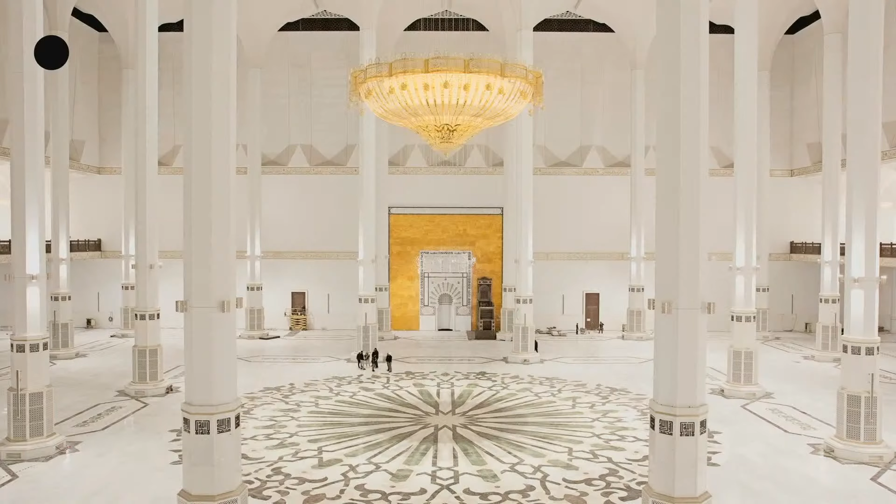This is the view into the main prayer hall. The prayer hall can house up to 35,000 people at one time, and they all have space to pray. The problem is you can't make them all escape at the same time, because you would need more space than the facade length of the building. Therefore, the amount of people gets limited to about 20,000, but that's still a very sizable amount.

This is the view towards Mecca, so to speak, from the entrance to the prayer wall. And here you can see a couple of the other buildings on the south-hand side - the library, the conference center, and the Quran school with the dormitories.

Just some impressions from there - the auditorium, as I said, and here this is a view into the library. I think here you can maybe see, obviously one of the big topics also was the topic of ornamentation in general.

Ornamentation has a very different quality in Islam than it has, let's say, for us - I'm Catholic, but Protestants have a different view on them too. So, of course, this is something where we worked with a lot of people that helped us understand, and who understood much better than us, and also negotiated with the client about what was possible, what had to go where, which text goes where. It's obviously a very rich environment, and I think it was a very interesting, sometimes complicated task, but in the end very enriching to us, to the team and our office.

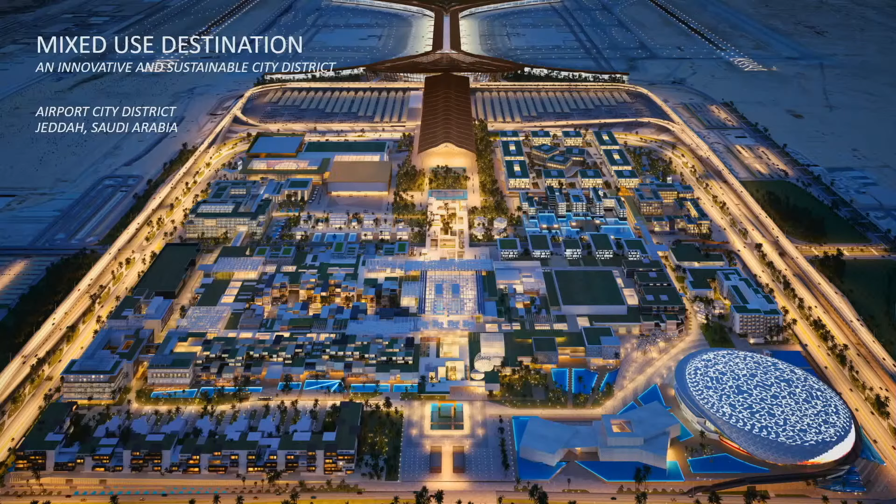Another project, but at a different scale, is this one - a mixed-use destination in Saudi Arabia, north of the city center, near the airport. This is a different scale because it's a master plan with all types of users, all types of buildings, all types of facades. Of course it's the same climate situation, but there are different buildings, users, and so different types of facades.

Now, to answer the question of how future building envelopes and outstanding facade content can be planned and implemented in an international context - of course each of us has an answer, but I want to mix 2 concepts to give you an answer: the role of the facade and the technical performance of the facade. We play with these two elements to have a vision for facades in future buildings. For example, here, to develop the first part of my answer, we know 2 of these buildings.

This was a vision from the beginning of the past century. These 3 buildings were designed across a span of 1 century. The other one is one of the last projects, in Egypt. The London building is very famous. But what I want to show you is the link between these 3 buildings.

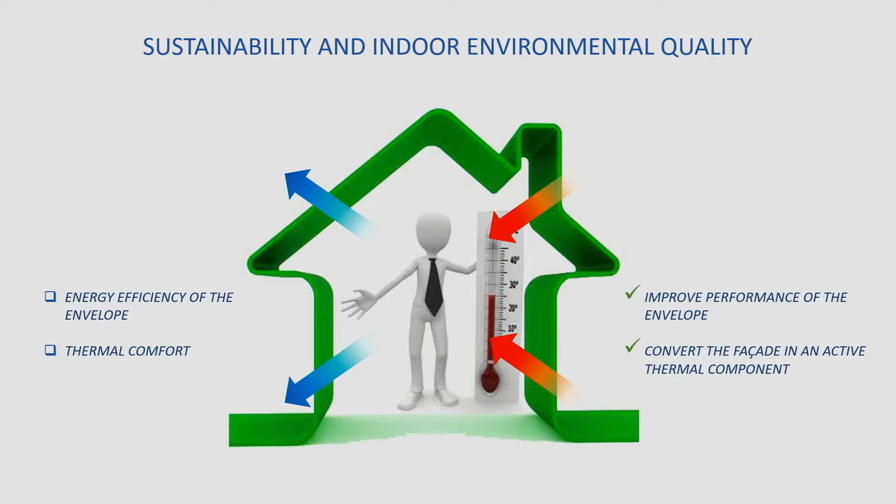For me, two aspects are very interesting: the energy saving or sustainability of the building, the energy transmission, and the quality of the ambient we build for the human being. So we have to build with the energy efficiency of the building, in this case with thermal comfort, to achieve the indoor environmental quality required by international standards for the clients, for the people.

I think we achieved the first issue, improving the thermal performance of the facade. But the second part, the thermal comfort aspect, I think today is still not very well achieved, because as users, when we live or stay for a long time near the glass facade, we experience thermal discomfort. This is the second part of the answer I will develop.

In this case, I use two case studies to show this, or to develop these two answers, with a project application and with a project investigation. The project application was...

It's a hospital in Doha. We were invited to a competition during the building stage of this building. At the beginning it was a hotel, then the client changed, and during that time, as you can imagine, all the structure and shapes were already done. So we had to work with the facade, with the character of the facade.

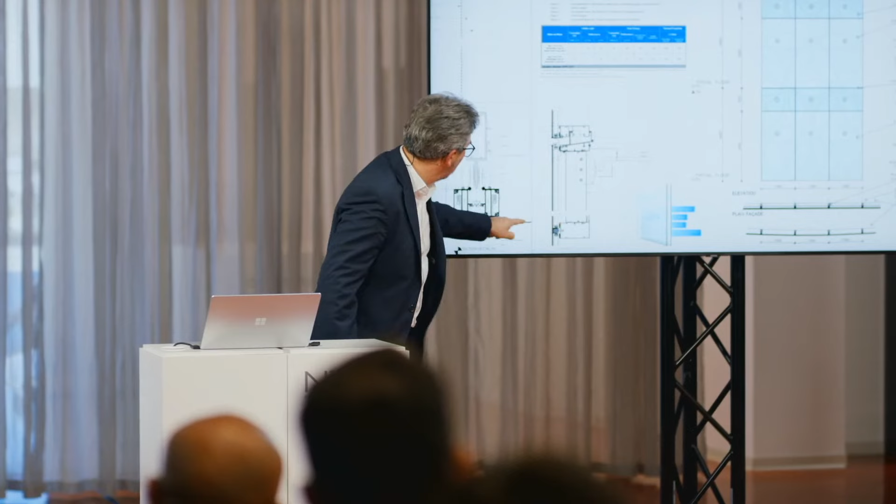As you can see here, for example, this is the layer where the dots of the digital facade are. It's very important when and how the process is made, because the fritted facade, as you know, is a painting template, but the tempering process can destroy the LEDs or the control solar layer, and so on. So it was very important to understand the process.

Finally, we have a double glass unit stuck to a frame, where the modules contain the digital devices, opening a module for future maintenance. And then, again, in the facade manufacturing factory, to assemble with a unitized module.

This was one of the changes, but all done in a very short time, because as you know, in Qatar each building must be opened this week before the World Cup. This is another building that must be opened this week. So for us, the other facades are also very important, but we went with a high-tech idea using more traditional louvers or glass facade.

Here you can see some mock-up phases, the facade without LED and with LED, where we had to design each dot of the lattice to now cover the LEDs. Here is a vision of a normal glass with LED facade. This is a mullion, an open module which contains all the devices to control the facade.

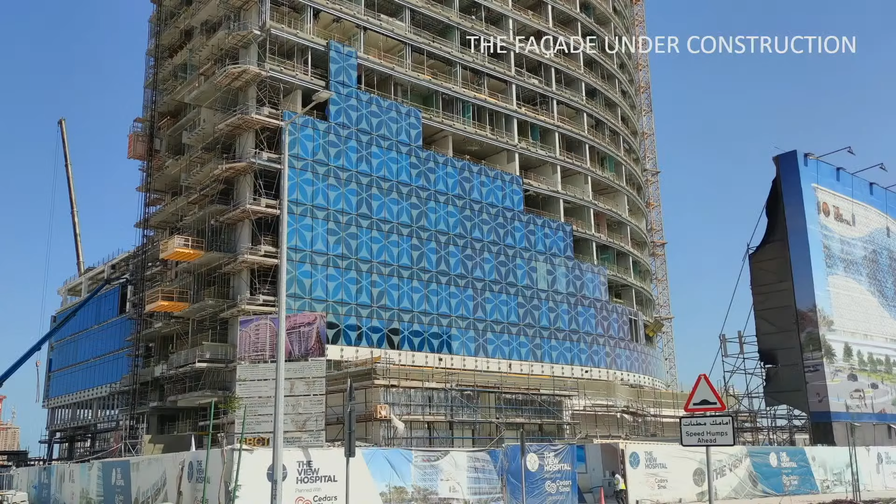This is a photo from about three months ago during the construction phase. This video was made by a colleague, I think three to four weeks ago, during the first stage of checking. So you can see the possibility of this type of facade.

The transparency is still, transparent facade during the night. You can show anything, yeah. Even the final World Cup, yeah, of course.

So another project, this is a project investigation linked with the second part of the answer, with the thermal behaviors of the facade. It's linked with my PhD research at Universidad Politécnica de Madrid. I tested here, using the university campus as a laboratory, an exterior lab, where in this module, 3x3 meters, you can test different types of facade.

These are two twin models where you test two types of facade and how they work. At the beginning, just to give you a picture of what the problem is and what I try to achieve with this technology.

As before said, it's very important when we have a glass environment, even with a very very low U value, the radiant temperature transmitted by the glass, because as we experience near the glass, we can have discomfort, local discomfort, or even whole body discomfort. We know international standards try to solve this problem, giving us methodology on how to calculate the index of thermal comfort.

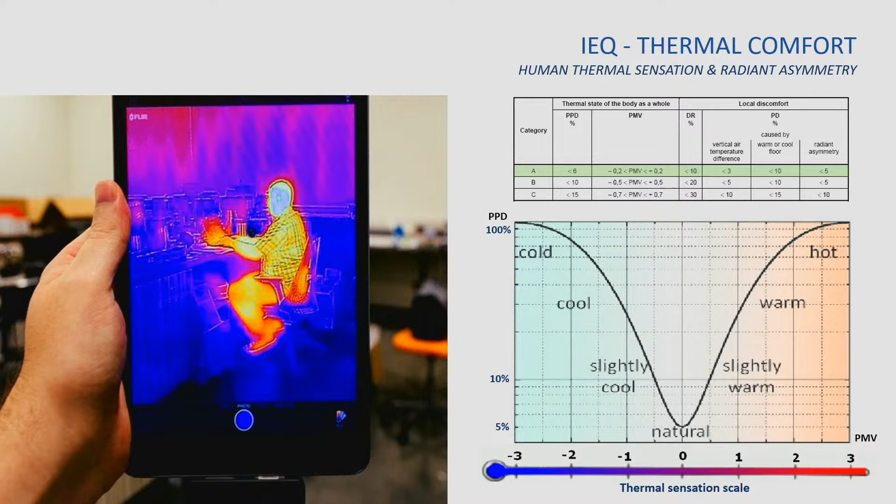There is, for example, PMV (Predicted Mean Vote), linked with the thermal sensation scale. When the value is 0, the person is comfortable near this glass facade or near other facades. Of course, non-transparent or traditional walls don't give this thermal asymmetry.

So we have to achieve this neutrality, sensation neutrality, by transforming the facade into an active element. There's actually technology in the market to make this happen. It can be with water inside the glass or with phase changing material. I use this technology because I think it's the simplest technology.

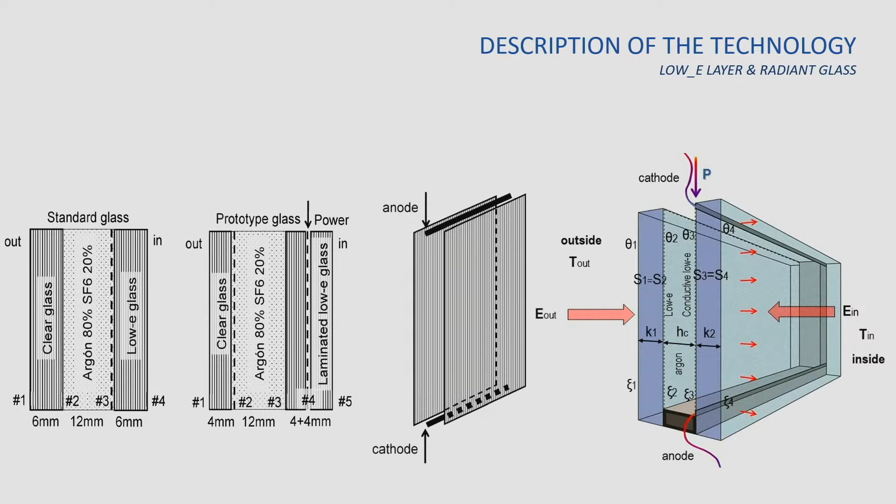It's just a double unit facade with a low emissivity layer, like this - well, of course this is with laminated glass, but it's the same. This layer, as we know, is a metallic layer, a transparent metal layer. So if you electrify this, it converts into a radiator. It transmits and emits low infrared radiation, so it can be used as a radiator. So this is the basic principle of this technology.

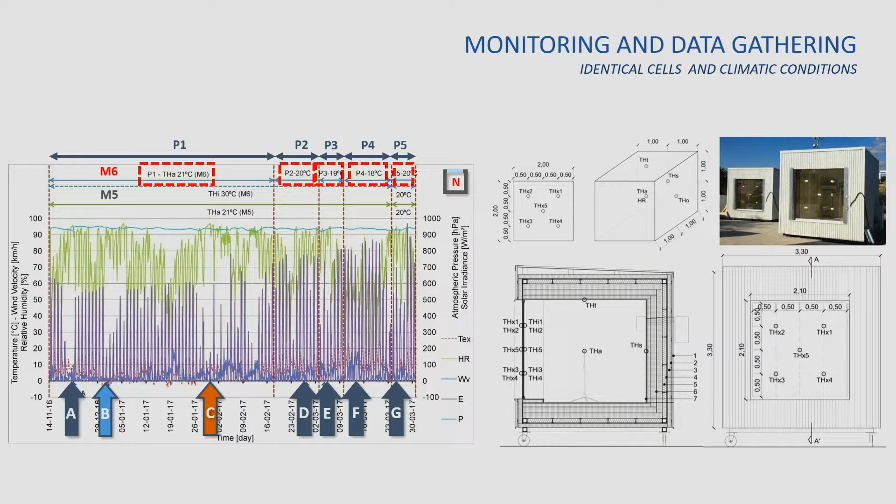Of course, it was tested over 2 years, both models, one with standard glass, the other with radiant glass, in all weather conditions. Lots of data was collected. Finally, I divided it into different periods to make a comparison between the two glasses, to choose some case studies to compare.

I don't want to bore you with graphics, but just to understand, I monitored every type of temperature inside the room, each face of the glass, all faces of the wall, operative temperature, radiant temperature, air temperature inside the building, in the center of the building, as international standards suggest, over the course of a day, and I calculated all the indices of thermal comfort.

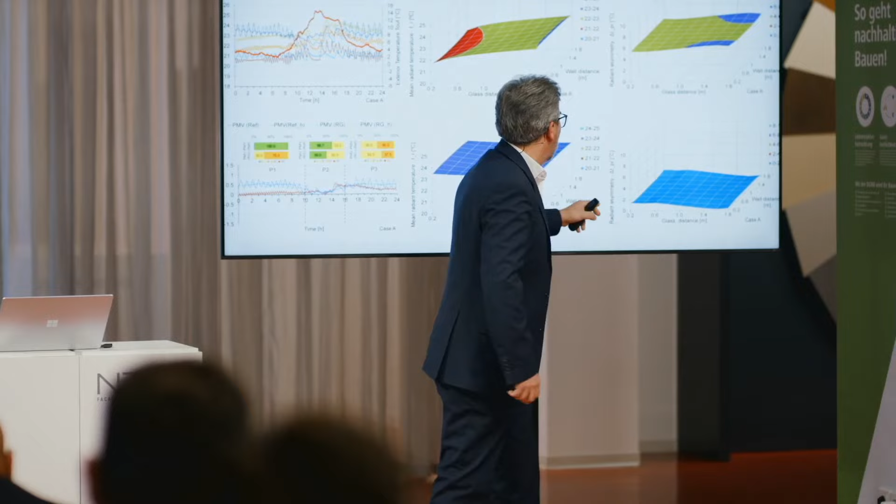We can see that with standard glass, the radiant asymmetry is between 5 and 7 degrees. In the radiant glass, the radiant asymmetry that gives us the non-comfort state of temperature is almost zero. So the asymmetry is almost zero.

Just to summarize, this difference between the index of comfort in these two models - to have a neutral sensation near the glass here, near zero value. We have at the back of the room a sensation of heat.

We know the international standard suggests calculating this in the middle of the room. But if we take into account all the rooms, there is a big difference—this is the index of comfort, not just temperature. Whereas in the radiant glass facade, we have the same index around all the rooms.

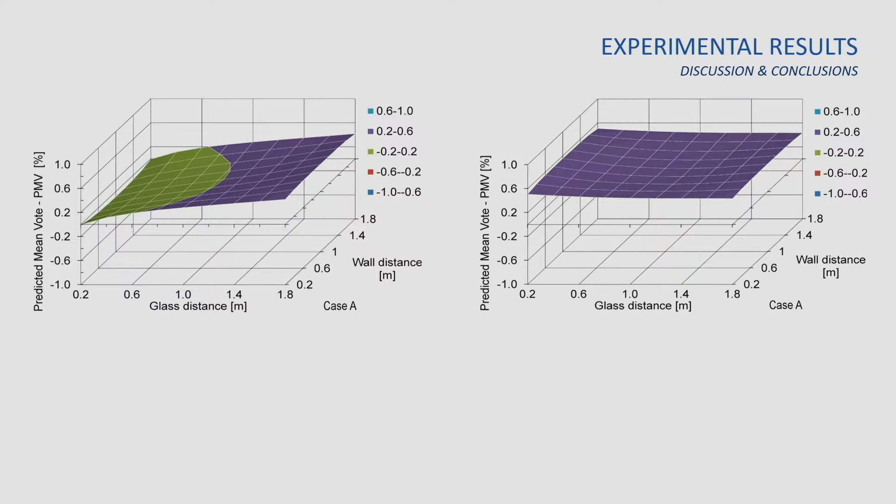As conclusion of this work: radiant glass can achieve uniform spatial distribution of thermal comfort level, even in the perimeter zone near the facade. It is not dependent on exterior climatic conditions, nor on the distance from the glass. Whereas with the other facade, this is not possible. It's also possible to reduce the air temperature and operative temperature in the radiant model to achieve the same or the best level of thermal comfort index.